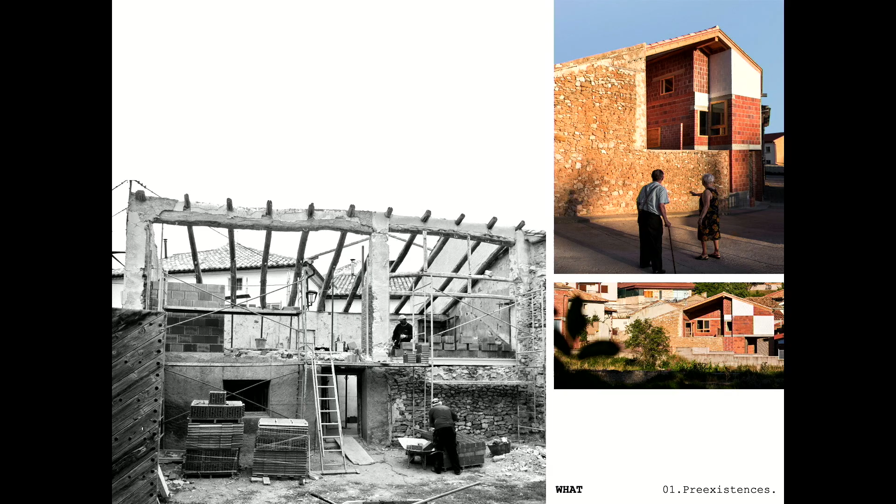Well, the house is built occupying an old corral in which there was a barn, a small construction with 2 levels, one for the animals on the ground floor, another for the storage of grain on the first floor. The stone walls and the wood beams have been kept in their original position. It is the geometry of these elements that shapes the overall volume of the project. It determines the inclination of the roof and the dimensions of the interior court.

The plot is located on the edge of the village, where the houses end and the orchards and fields begin. The house is protected in plan and adopts a U shape. In this way, it avoids visual contact with the neighboring houses and opens toward the landscape. At the same time, it generates a patio, a courtyard in the center.

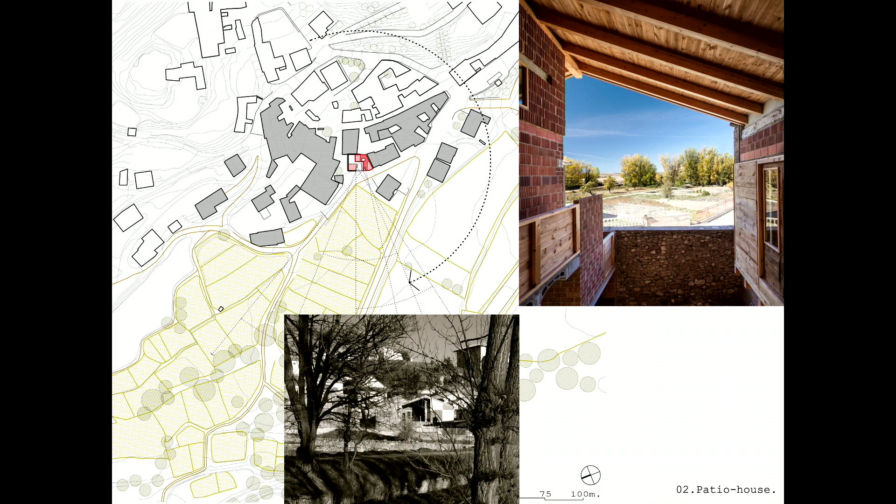The whole house is topped by a very simple sloping roof. The patio is also covered and becomes a kind of indoor volume, which remains always protected and shaded. The volume of the patio equals 1/3 of the total. All the external woodwork faces the patio, and it's also protected from the water and sun. That's very practical because they can be very simple, and some of them even recycled. In fact, we could consider that all the woodwork is internal woodwork.

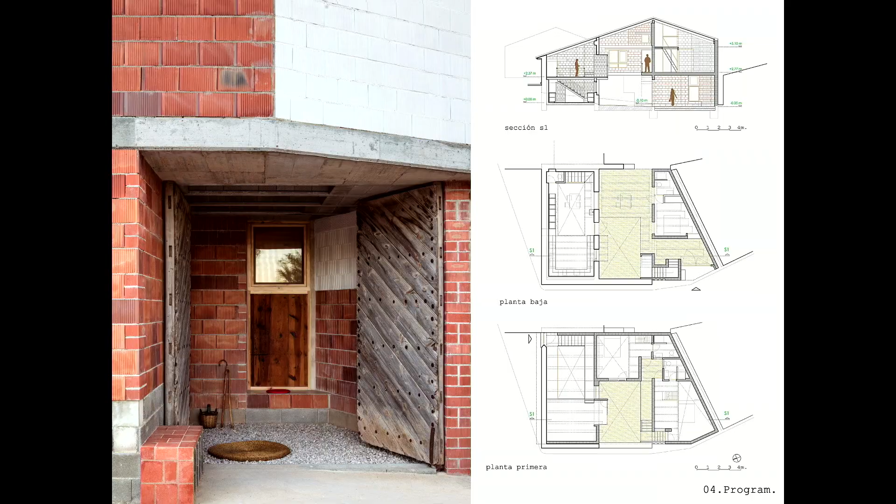The access is through a large and recycled corral door. When it is open, it becomes an area to sit down or stop to talk with the neighbors at the entrance, which is a very common activity in the town. This space communicates with the patio passing under the house. The patio is the heart of the house, the most used and most polyvalent space. Most of the day it is shaded and well ventilated.

This is the access: on the right side to the common areas, to the other side to the 3 rooms separately. The common area is situated inside the thick stone walls of the old construction, which is also semi-buried. These zones maintain a constant cool temperature, always around 25 degrees in summer. It contains the dining room area, also in the patio, which is used most of the time.

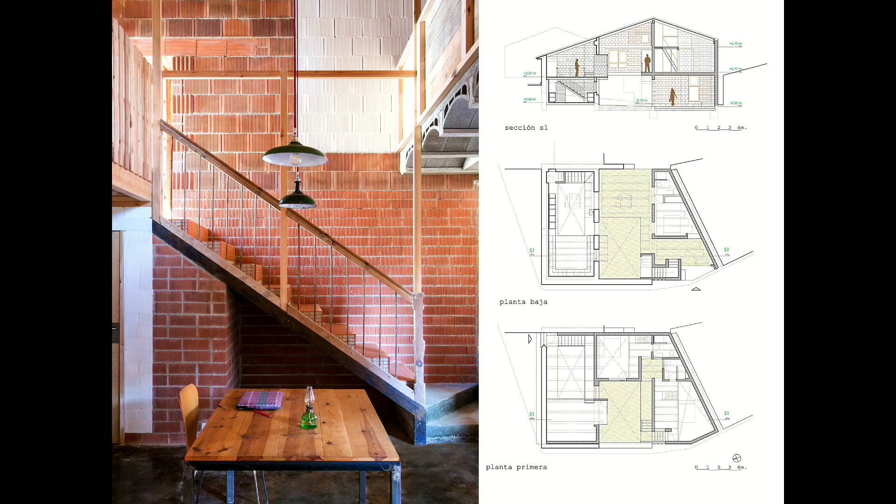The kitchen, well, in fact, there are 2 kitchens in one to allow the use of several people at the same time, and a wooden mezzanine with the living area that is also used as a study and play area for children. The 3 bedrooms are situated on the opposite side of the patio, 1 single room on the ground floor and 2 family rooms on the first floor.

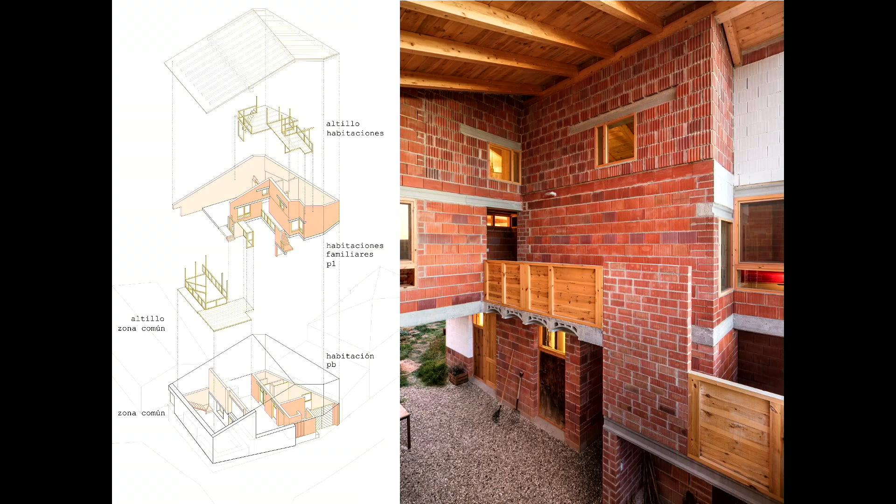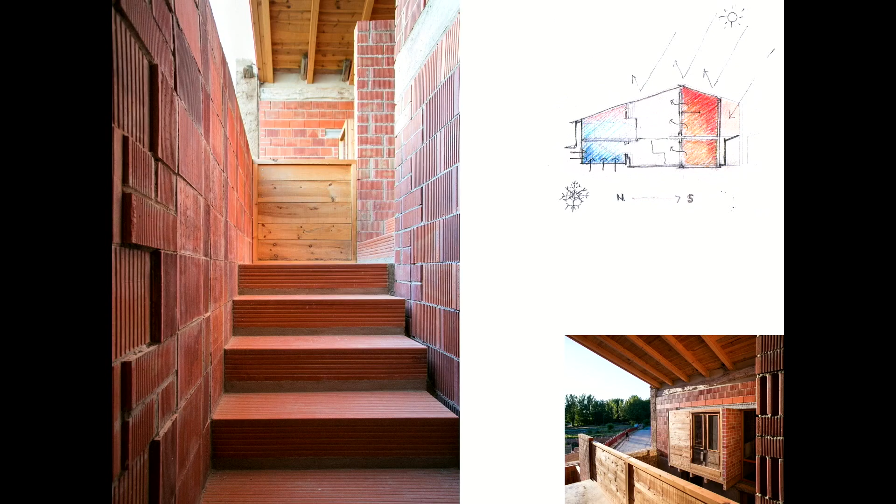They are built with brick, with a single layer of thermoarcilla, thermoclay. And these walls are, of course, less insulating than the stone walls, but enough to insulate from the sun during the day and accumulate some heat that is released at night. This works very well because at night the temperature drops a lot and it's usually quite cold. That's because we have to think that the town is at 1,300 meters altitude.

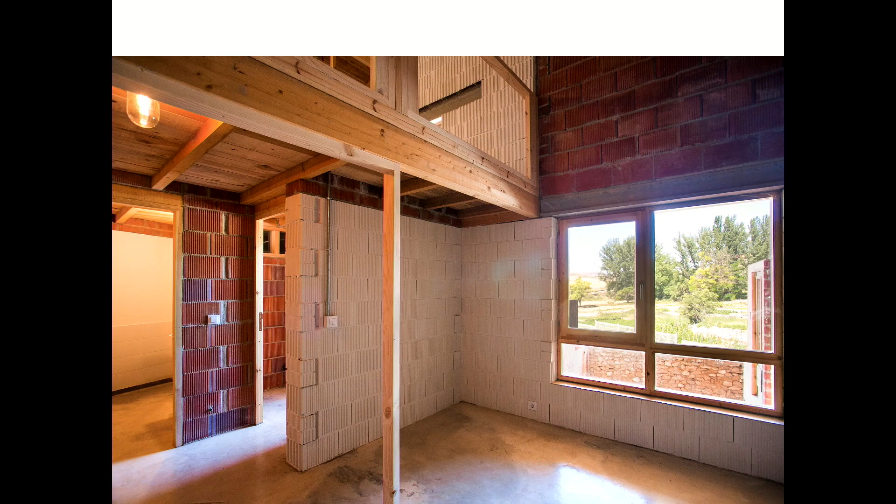The access to the bedrooms is by an external staircase that is ceramic. The rooms are focused on the landscape, and they have 2 levels, one downstairs for parents and another upstairs for kids. These 2 levels are built with a wooden superstructure and communicate internally with a staircase, also made of wood. The wooden superstructure occupies the highest part of the house, taking advantage of the space that remains under the sloping roof.

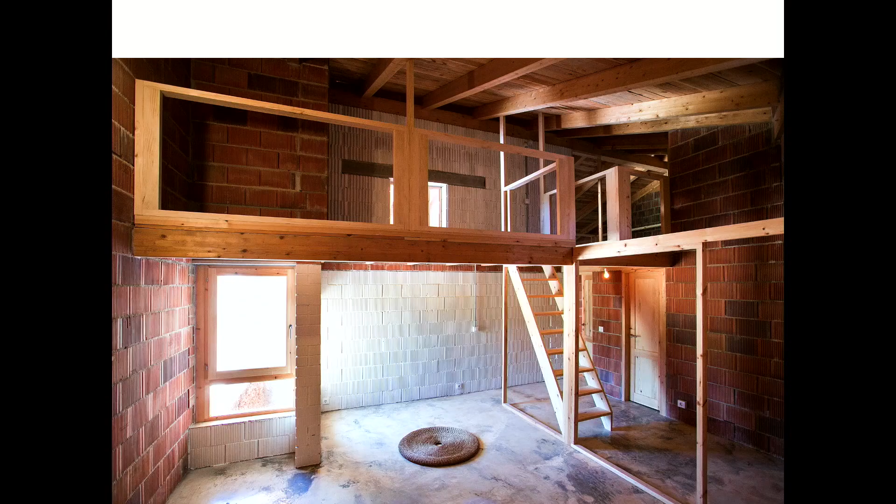The interior divisions were made with wooden frames that were later covered with recycled wood to make the railings. In the future, these divisions will allow us to split each room in 2 if we want.

Well, I have to say that a few months before starting the construction, I didn't have a clear idea of what materials I would use to build the house, nor what the constructive system would be. The answer to these questions arrived in a very simple and natural way during the previous visits to the site, while traveling through the surrounding villages and visiting the local warehouses and material stores, but especially looking for the builders who could work on the house.

I remember this day very well. I was talking with Puyo, a bricklayer who was doing small things in the area. He explained to me that the thermoclay was used a lot, especially because it was a large piece and allowed them to work very fast. And then, casually, he said, what I do is take the 24 centimeters depth thermoclay, because since it is 24 centimeters long, it allows me to combine 2 pieces so I don't have to cut.

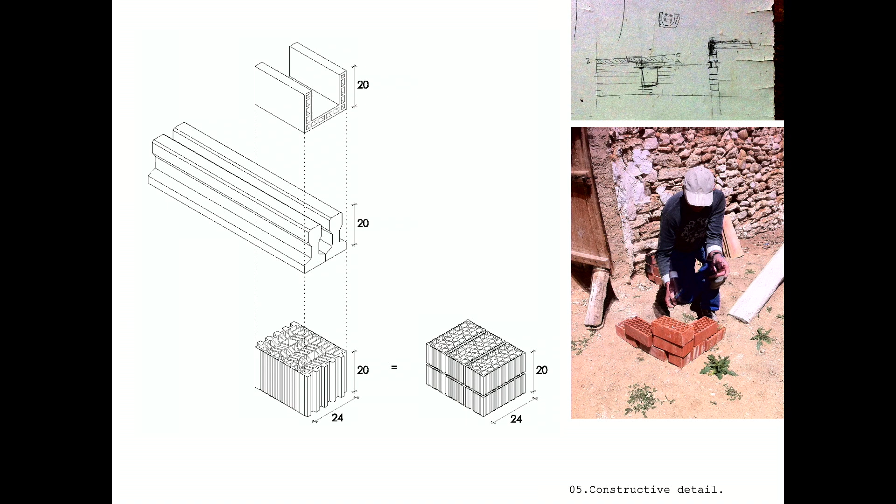Exactly, the thermoclay piece of 24 centimeters combined long and height perfectly with Gero, so that 1 piece of thermoclay equals 6 pieces of Gero. Thermoclay is the big piece, of course, and the smaller brick is what we call Gero.

He also explained to me that the prestressed concrete beams with a height of 20 measure 12 at the base, so 2 beams also make 24 centimeters, as well as the thermoclay and Gero. Finally, the band piece also makes 24 at the bottom by 20 centimeters height.

Well, it was a conversation of just 30 minutes in which we took bricks and put them on the ground, making one-to-one models of different situations. We also made some drawings on a wooden board that was on the site. And in these drawings, for me, everything was already there. In fact, I saw that with that unique constructive detail, the house could be built.

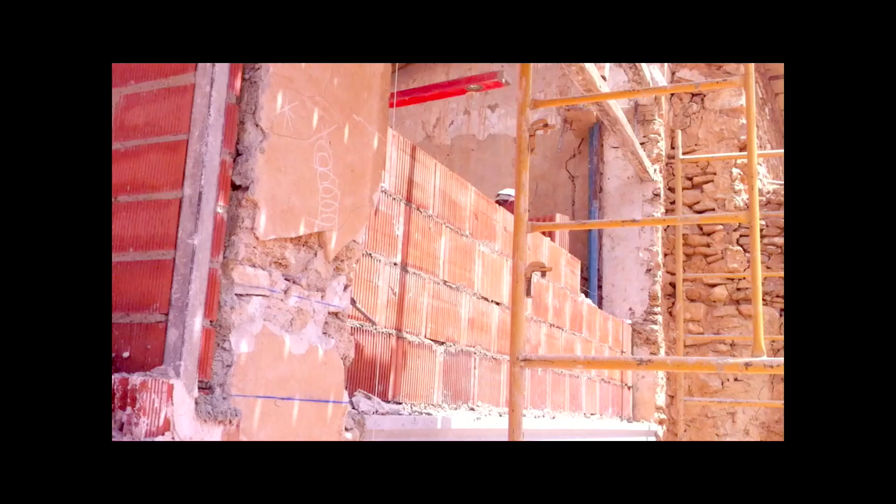Finally, we chose this bricklayer and his assistants to do the work. They were a group of 3-4 people from Romania living in Teruel. They work a lot for the people of the area, doing basically reforms and partial repairs of houses. They work by the hour, 16 euros per hour, 10 hours a day, almost non-stop.

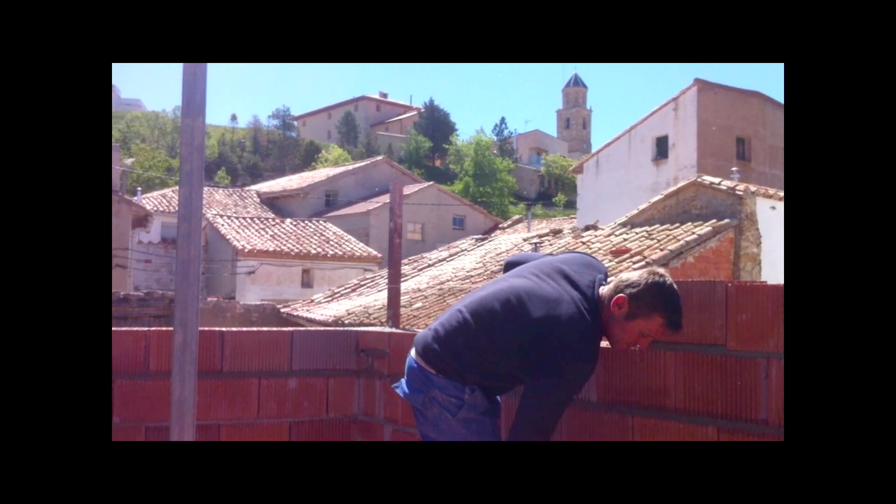In this case, charging by the hour is decisive, because the simpler the construction was, the faster they could work. And the faster they work, the cheaper the house could be. And the fact that the constructive system we chose was very common for them allowed them to advance very fast and therefore economize the construction.

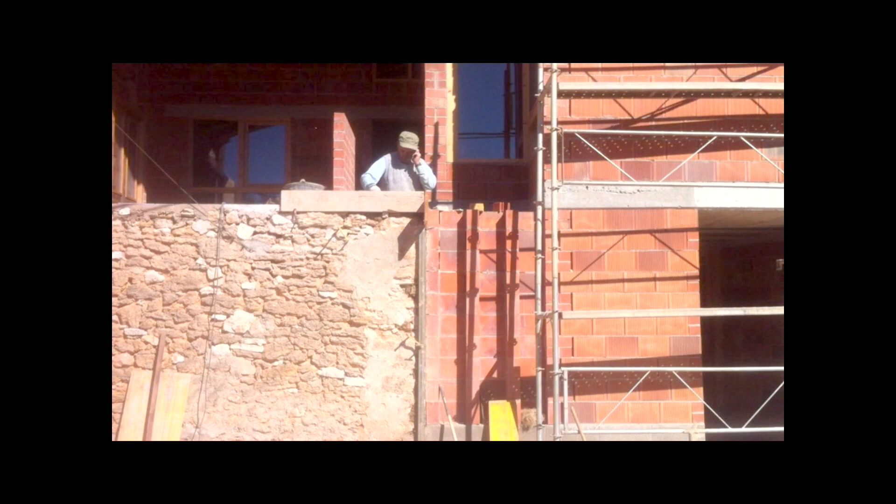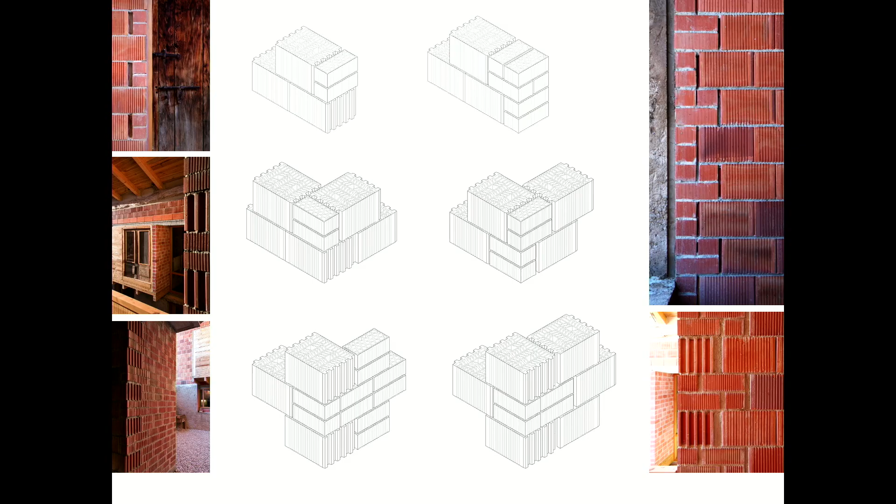The idea was to build like a Lego, fitting pieces without having to cut them, building a system of walls of 24 centimeters depth with a horizontal joint rhythm every 20 centimeters. The combination of thermoclay with Gero allows solving wall ends and corners in different ways, but always without having to cut pieces. It was about doing what they always did, but with the difference that it could be seen. The same system, but with good lyrics.

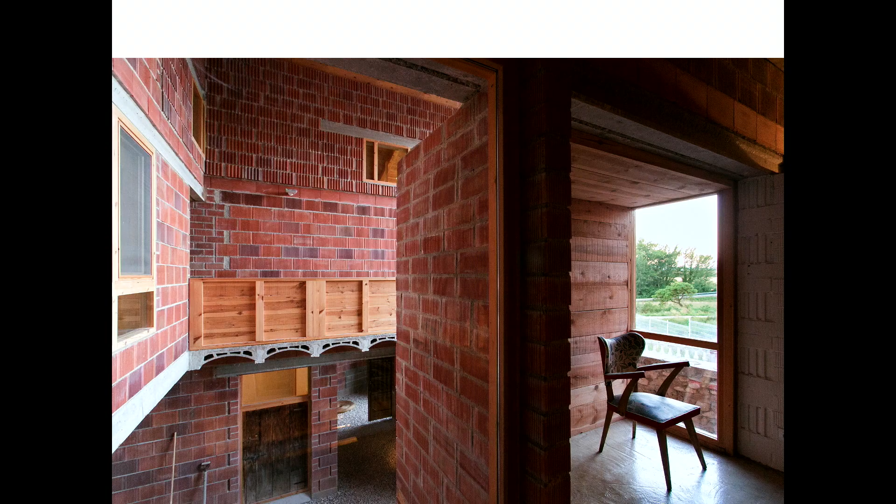And also, in the same way as happens in Lego, we were building the structure of walls at the same time that we built the exterior finish and the interior finish. That was also very good for the project because it accentuated the confusion between inside and outside.

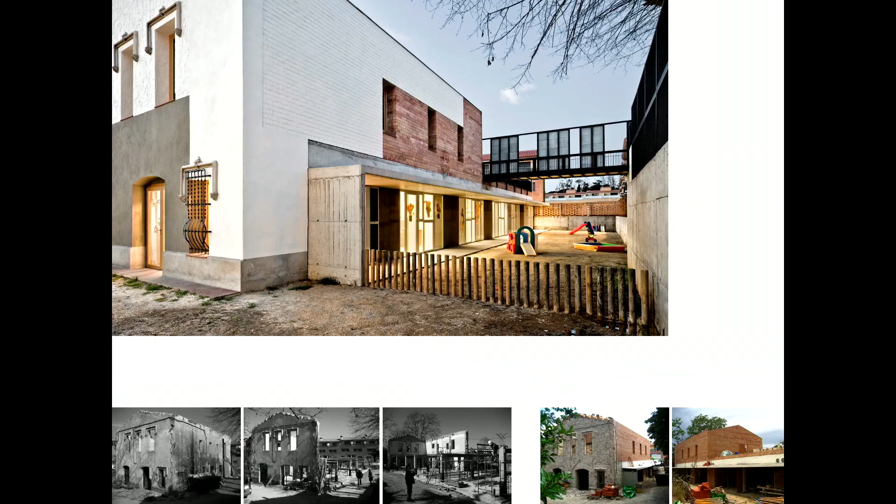We had to build a new school by expanding an existing building, but finally a large part of this building, an old house, could not be saved, and it was necessary to demolish and rebuild 50% of the volume. If we had to remake the volume in its previous form, we wanted to differentiate the original parts from the reconstructed ones. So we convinced the builder and the town hall to make the walls with a conventional brick, but without the final coating.

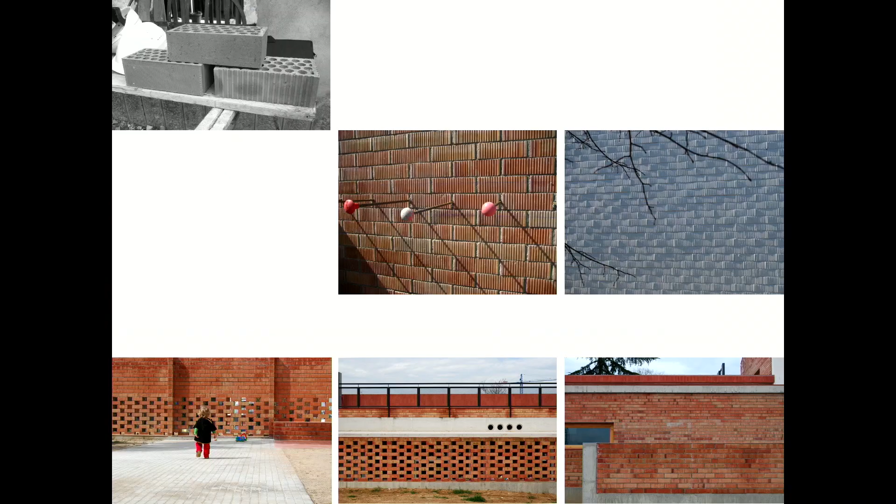We chose this brick with scratches that was already there. New textures appear, and then also new combinations. And we realized they were materials not very experienced as a final finish, but they could have a great power of expression. It was a special result with a piece that we had very close, so very easy, very cheap, and without having to design it. We liked the result so much that we decided to use it on the rest of the walls of the new construction and also on the perimeter of the site.

Now we return to the house in the springtime and the towns around. Normally, the towns around have two sides. A side designed to show to others, that faces the street, with a finish that wants to be novel, generally smooth, rendered, painted, with conventional windows and doors, and formally very similar to each other. But there is another side in these towns, the back side of the village, the one that generally faces patios and orchards, normally the part of the house where there is more life.

It's a facade that is not thought to be seen by others, but these are the places where more things happen, and from my point of view, where the most interesting things happen. Because there we find a more functional architecture, more direct, more honest, responding clearly to the needs of the users. More generous openings appear, terraces, overhangs. There are more volumes, voids, shadows. The materials are simple, but they are shown without any problem.

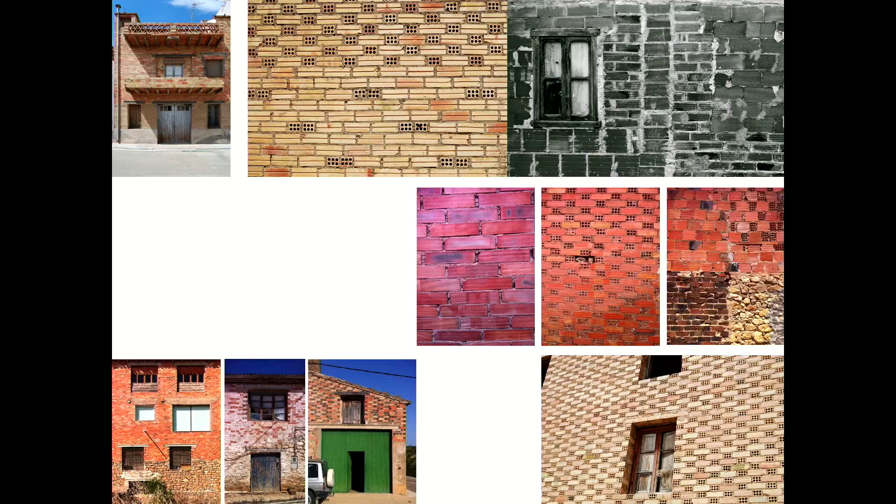We can find many original solutions, different textures and all kinds of experiments. Many types of ceramic pieces are used, especially in their most basic versions. It is also the building way that's used in the repairs of old houses or buildings for tools, vehicles, agricultural machinery, or animals.

It is obvious that people, from the town, think that it's an unfinished architecture, that it's not to be seen, not to show. But it's also obvious that it's part of the landscape of the villages, knit and mixed with the old stone walls, and part of the rural landscape. Bricks and pre-stressed beams have been natural substitutes for stone walls and wooden beams since the post-war period until today.

But is this vernacular architecture? Vernacular architecture means working with what we have closer, which is easier to build and cheaper. These were the criteria by which the town was built. During centuries, that meant building with stone, wood, and mud. In fact, these were the only materials they had, extracted directly from the environment. The result was an architecture integrated into the landscape and without architects.

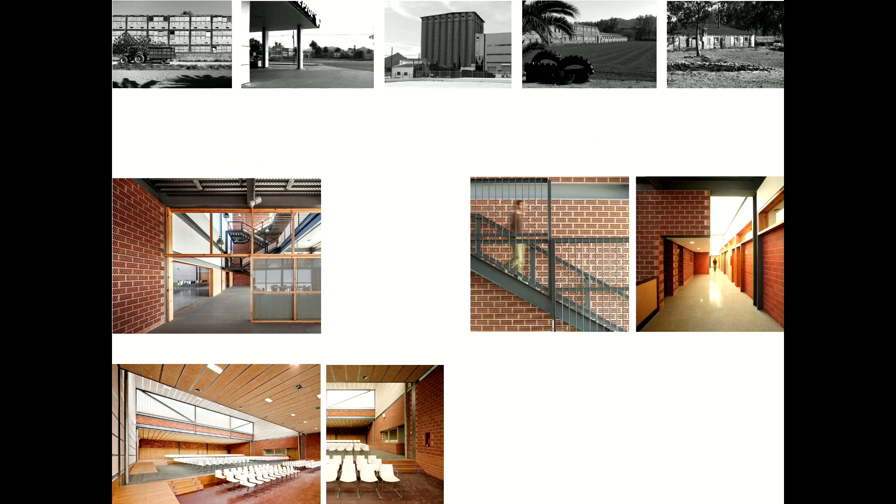That means two scales: an industrial environment typical of the periphery with light metal buildings, but directly in contact with small agricultural constructions, farms, and self-built architecture.

In this case, we used these basic bricks that we can see everywhere in the delta. We use them in part of the facades and in part of the interior walls, but also to improve the acoustics, or solve the air conditioning return, or to ventilate the room installations.

Some of these solutions were not in the initial project, but the continued contact with the construction materials and with the most immediate environment made the result look like this.

Continuing with the project in the house in 3 springtimes, the construction materials for working in these villages were basically obtained in the local building yards. There were small stores in Utrillas, Montalban, Aliaga, little towns about 20 minutes away, and in Teruel, the capital, at 40 minutes. Depending on the warehouse, you could find more or less variety of materials from different parts of Spain. But what it always had in stock were the basics: ceramics, bricks like thermoclay and gero, prefabricated concrete products, and wood.

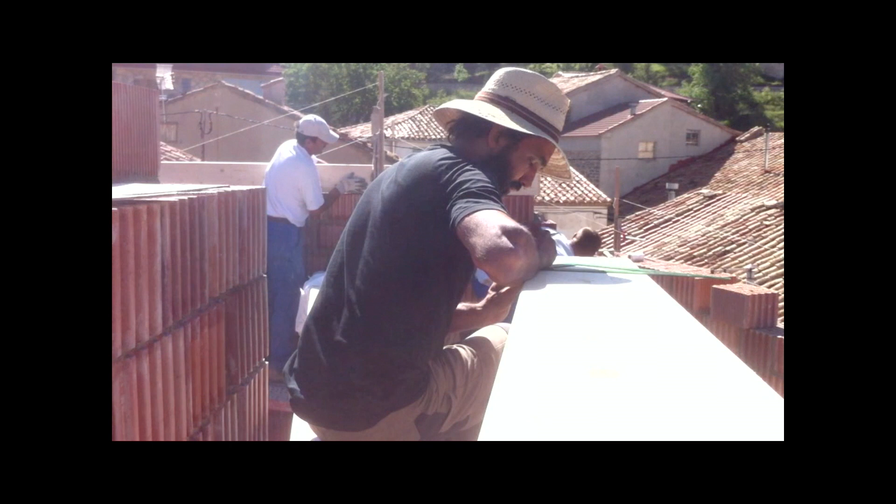This constant presence on site, combined with the intermittent and slow rhythm of the works, is very important to the final result of the project. It allowed us to change, improvise sometimes, and experiment during the process. If we think like a film director, the process was more like a documentary than a movie—with quite clear starting ideas, a starting project, but an open system in which reality and improvisation fit, and many times were the protagonist.

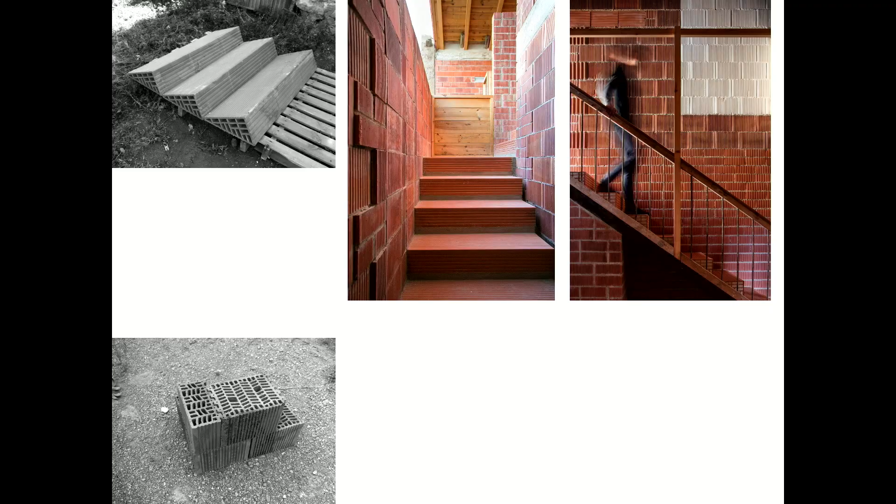During this process, we incorporated some pieces found in the construction warehouses, like ceramic steps, stock remains, things I didn't even know existed. We also found in the barn a large number of old woodwork pieces that had been saved from homes demolished around the area, and we decided to catalog and reuse them. They solved doors and windows, but were also recycled as interior divisions, balusters, shutters, etc. Of course, we also recycled stone, wood, and tiles from the demolished areas of the barn.

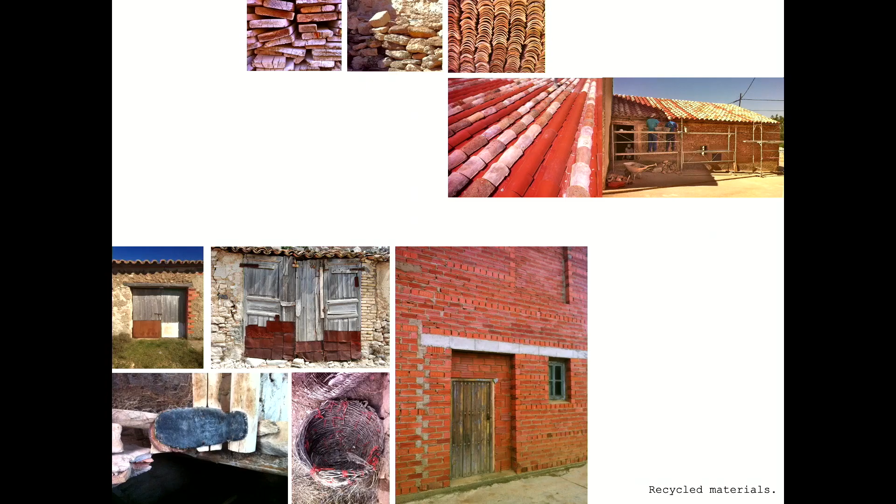But we recycled in a calm way. I mean, we simply reused what we had close by and what could serve us, in the way it has always been done in the villages. Things are repaired and reused again and again, just because it's the most logical.

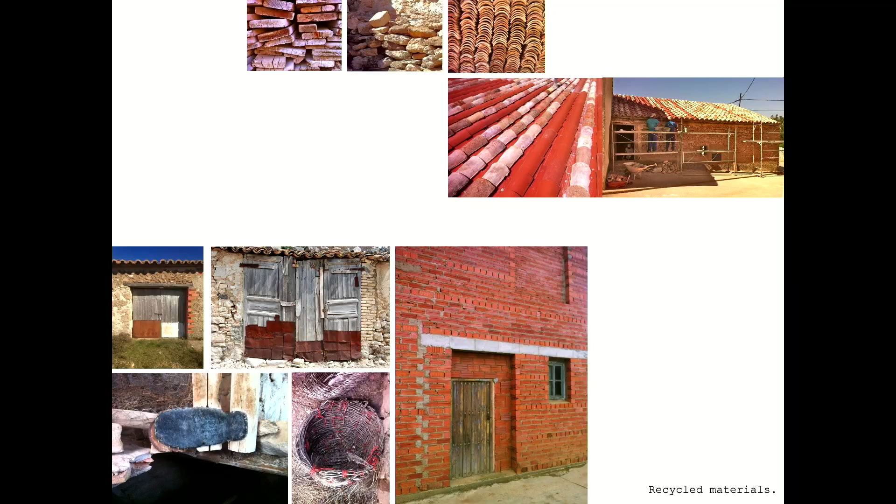We also recycled materials generated by the construction itself: pallets for handles and furniture, Galician pine wood left over for tables, shelves, handrails. Or, for example, the broken pieces of thermoclay you can see here. Some of them were broken when they arrived at the worksite, by transport or defective manufacture. Those pieces were at first returned, but later we decided to separate and save them for use in the final part of the house. We put them turned 90 degrees, so the broken parts were not visible.

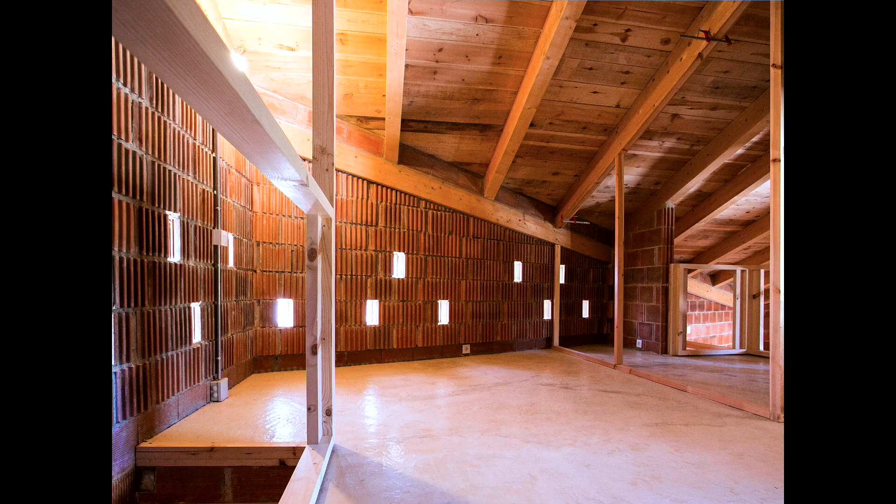The result was a different texture, which also helped us differentiate the final surface of the mezzanines from the rooms. This is the view of one of the almost finished mezzanines. I think we managed to turn something that seemed like a problem into something positive, and these kinds of situations are the most interesting for us.

But if I have to talk about a reference, I should talk about this: Alvar Aalto's house in Muuratsalo. I like almost everything about it, but even more than the result, what really interests me about that work is the attitude. Alvar Aalto seems to have said about the experimental house, or the summer house, that we must combine laboratory work with a play mentality, and vice versa. That attitude, maybe, was the clearest influence I had, and it's the one I try to keep with me during the whole process.

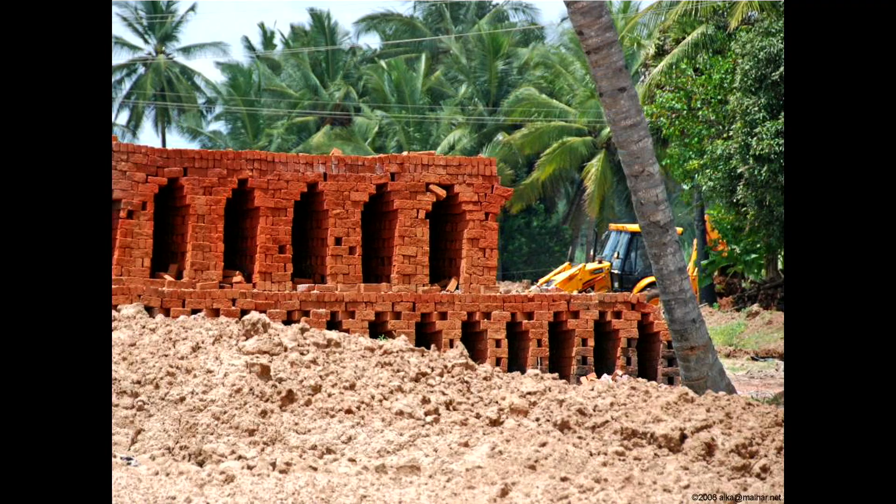And the bricks that get made are actually not like the factory bricks, where you have to build huge ovens and Hoffmann kilns with coal, etc., going into it. The ancient way of making bricks, which is still being made in most of the world, pre-industrialized still in our time—what happens is that the bricks are stacked as a pile, and the stack is the oven. When they finish cooking, the bricks are sold, and the whole oven is gone. So this is how humans made bricks.

The genius part of the bricks, or why it was a manufactured material, was because it was modularized. Even though the brick is rectangular, you could make curved things with it, unlike Lego, by the way, because the mortar allows you to do arches and do all kinds of things. But what is interesting is how does it affect things?

For me, it was important to see how bricks affect the socio-economic and environmental impact in today's time, because most people dismiss bricks as a very high energy material because it requires so much coal. In my journey, three decades as an architect coming from Bombay, from conventional schooling, and discovering things by thinking more deeply about them, I realized that you cannot just say that brick, in all our green rating systems, they say how many kilojoules.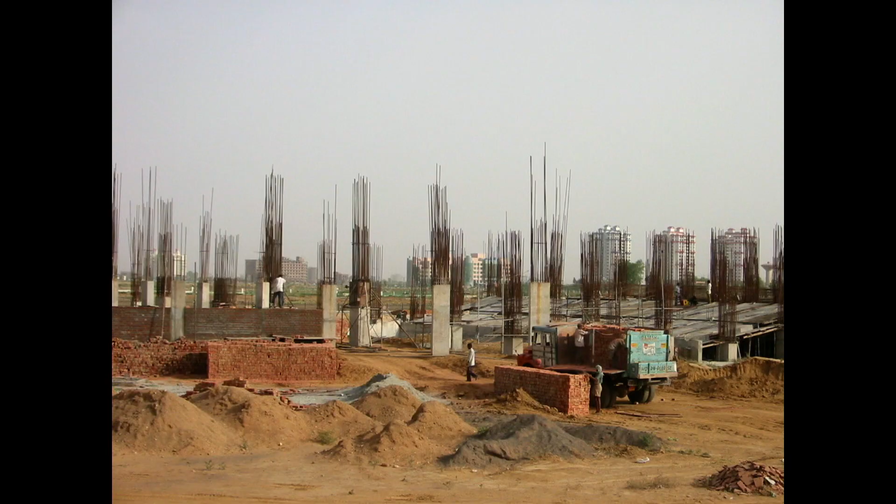It's not like that. There is not only quantitative energy, there is a qualitative energy. Am I cooking it with coconut shells or with coal? It makes a huge difference to what industries have to go into taking the coal out and so on. So I went into deeper questions in this journey, but I want to explain that where I came from was

that brick, even though we have built the biggest complex cathedrals and all kinds of large spans and very tall buildings with brick all over the world, not the natural laws, but the human laws have prevented us today from doing more genius buildings with brick, because we have made bylaws such that we can only use bricks as infilling material inside concrete.

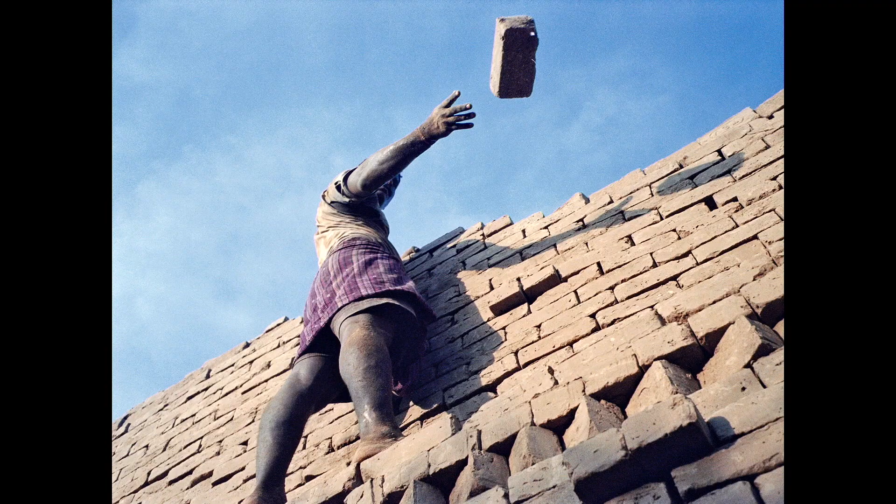We've made it in every country, I don't want to deviate over there, but I was quite intrigued that a brick is not even allowed to take weight in many places. And even in Australia, they call it brick veneer, as if it's just for show. So having looked at the area, I realized in our times that to understand the complexity of materiality in the age of climate change, we have to look at the material not from the time we get it from a manufacturer's catalog, but from the way the material is already manufactured. Already there are questions embedded.

So here I noticed in our context, these are regular industrial brick sizes, but they're not industrially made. These are handmade bricks. And I started realizing the way the making of a material like brick is embedded in the territorial questions of the place. For example, these thinnings come out of reforested trees that are grown for scaffolding, because these woods are mostly casuarina. It's a very straight tree, and it's very useful as scaffolding. And the thinnings of those that the people planted are used for firing the ovens.

And these are the typical brick stacks, which are then plastered and closed, and then they go into firing. And after they are fired, the bricks which are on the outside are a bit cooler, so they are less baked. So either they are rebaked in the next round of firing. So there is no oven. This is the oven. And whatever is external, you might use in interior areas where you don't need such total brick strength, or it doesn't have to be that waterproof and so on.

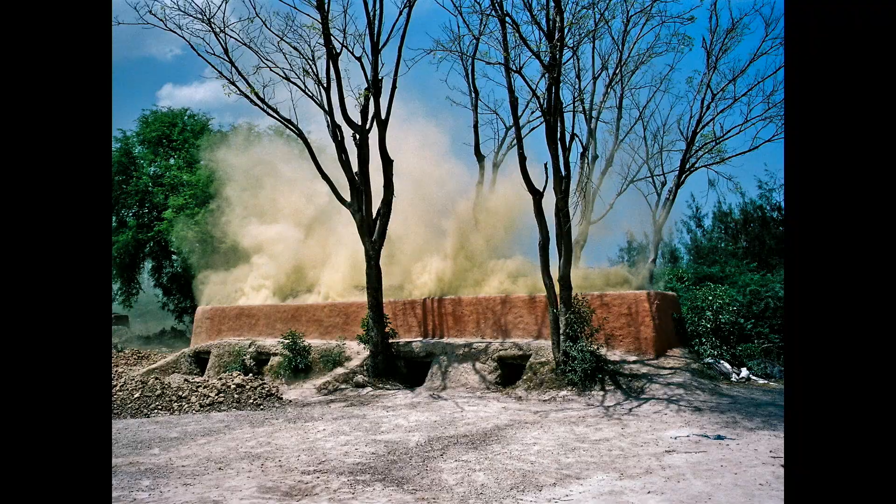So here you see a society where they are able to produce small amounts of bricks only according to how much clay is collected after the monsoon. Otherwise, they are probably rice farmers or they grow this kind of material. And they also do lime mortar. They make lime. There are lime kilns and so on. And so when I came to South India, Auroville, and there was a whole city to be built there, I wanted to see to what extent, with new eyes, I could rethink the brick.

So Wall House, the project that a lot of you probably know, was my first application of bricks. But here you will notice that these bricks are only 2.5 centimeters high, because in my search into the way bricks are made, I realized that if it is all being done in a handmade fashion, then it's good to stick to the handmade size that they also made. The other sizes were made for the convenience of the machine and various other factors, and introduced in the local landscape.

So I took the old South Indian bricks that are still being made in very small pockets, and those bricks are very easy to work. They are not heavy because they're so thin. It's really like craft work, because you're not exhausted lifting a brick. So the brick and the mortar are almost equally thick, actually. And the brick is weak compared to the factory brick. And I realized that I also didn't see it, like we have just spoken in the previous examples.

I haven't seen it without mortar and without plaster. I exposed it for us to start seeing it more clearly, that these bricks also exist. Because normally the imperfections exist because it's done in a very local way. And I realized that with those imperfections, when Louis Kahn came and built those fabulous brick buildings in India, he was using wire-cut industrial bricks. And so we all started disliking our own bricks, because of the imperfection.

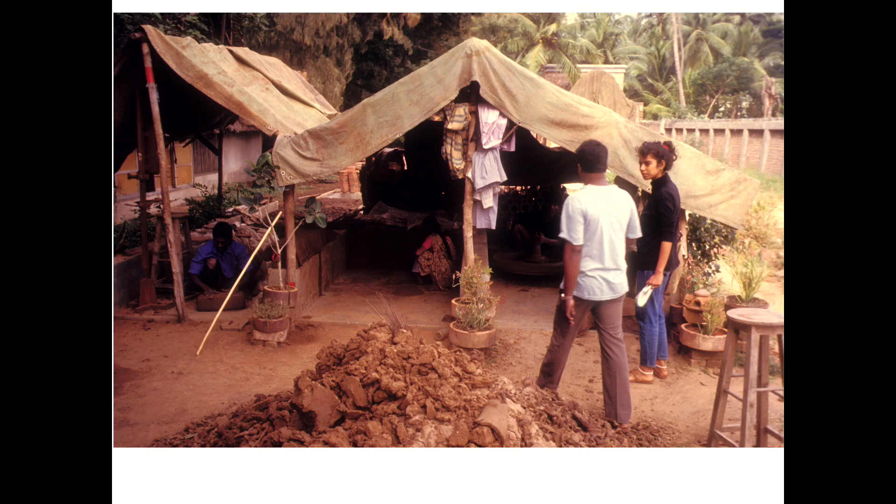But I'm just showing you an image of myself from 30 years ago when I was doing this. I was just straight out of school. I started my practice at 23, actually. I think in a lot of things, you are very naive, and it's good. You don't fear so much. Later, as you grow up, you ask too many questions and don't want to take risks, I suppose.

But what was interesting for me is to realize that there is no boundary needed between brick and the use of terracotta, either in the floor finishes or in the construction of roofing tiles and so on. And I started discovering that whenever a material exists, like clay, there is the skill. It looked to us like there's no labor, unskilled labor we were calling it, because you thought there's nothing in this place. I came from Bombay as if there was nothing. And now I know that there's always something, that in the foreground there is clay, in the background is the skill of some people making pots out of it.

So I started working with that material in a holistic way, not separating the brick from the masonry of the wall from the ceiling and so on. And eventually landed up using cones that we made with coconut shell fired in the open, just the way they do it, making stacks next to the rice fields, so the people are not necessarily working in factories, but just producing the material. It's all temporary, but the house is permanent, and the processes don't leave their imprint.

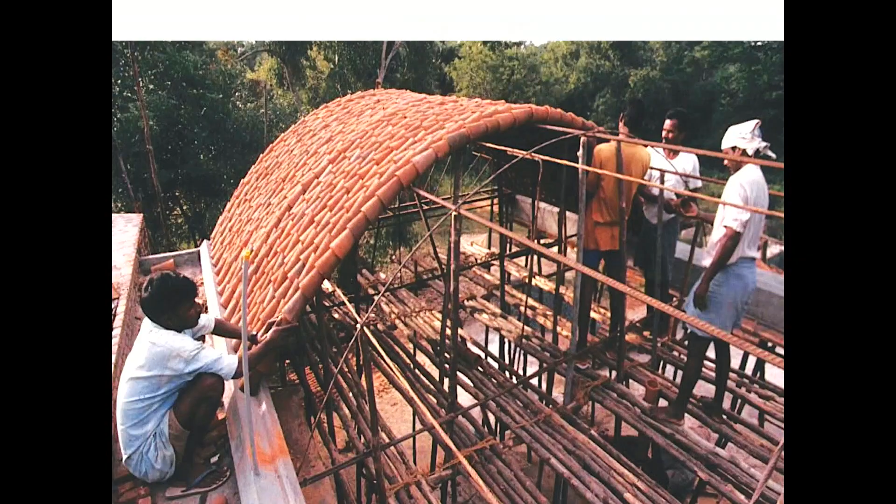And I started using these kinds of highly insulating materials for the ceiling through catenary curves. That's why I don't know anymore what is vernacular and what is high-tech. People would call it low-tech, but you need to know lots more calculations somehow to do these types of things, which we usually do empirically. So the advantage of these kinds of systems is that the traditional roofing tiles need a lot of wood substructure, and we don't have wood anymore.

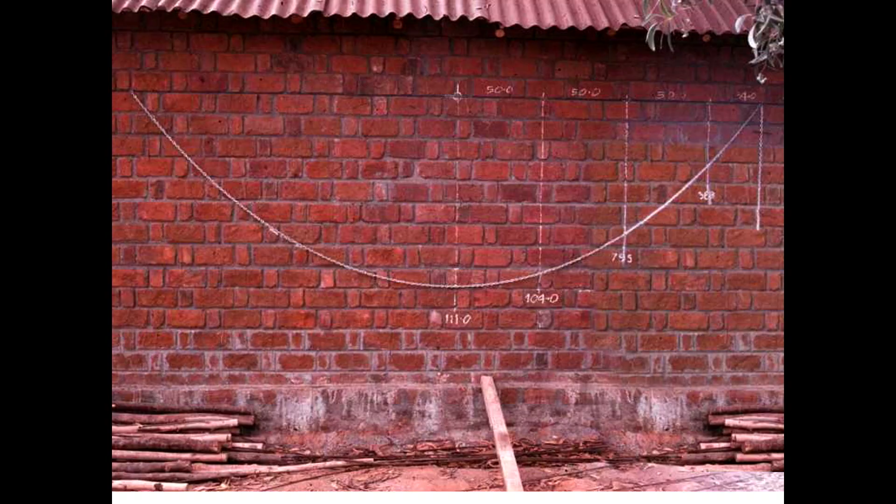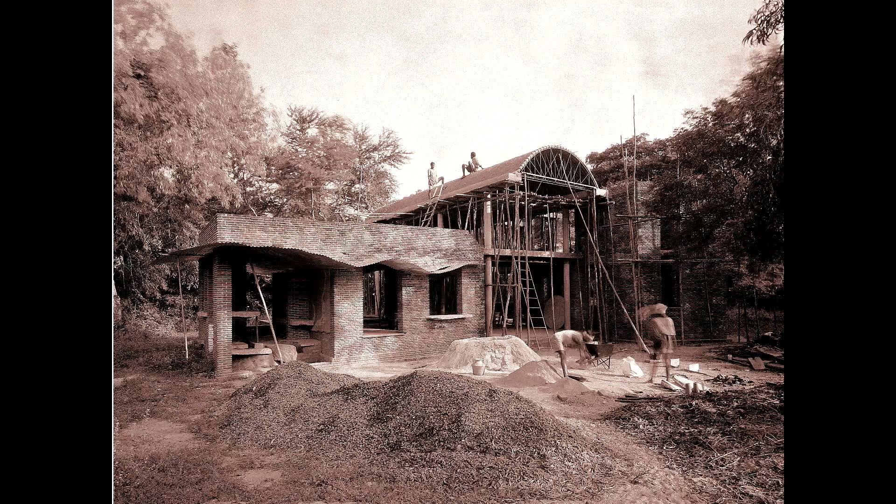So this was a way forward to intelligently use these materials, and I needed a lot of support from the craftsmen. I was supported much more by them than the engineers, because the engineers were telling me all the things we shouldn't be doing, and the craftsmen were just eager to try out. And I had a sense of confidence because they are used to handling material. So with their help, I was able to produce this same wall house.

But I did so many more experiments on the side that I won't have the time to tell you, but I made all kinds of things with the terracotta once I started, and I had a sense of community with the craftsmen, and we got ideas. These are for making this kind of jack arch systems, also in masonry, for flatter roofs, because those vaults will not allow me to use the ceiling, even though it's efficient. So I need a way to make flat roofs.

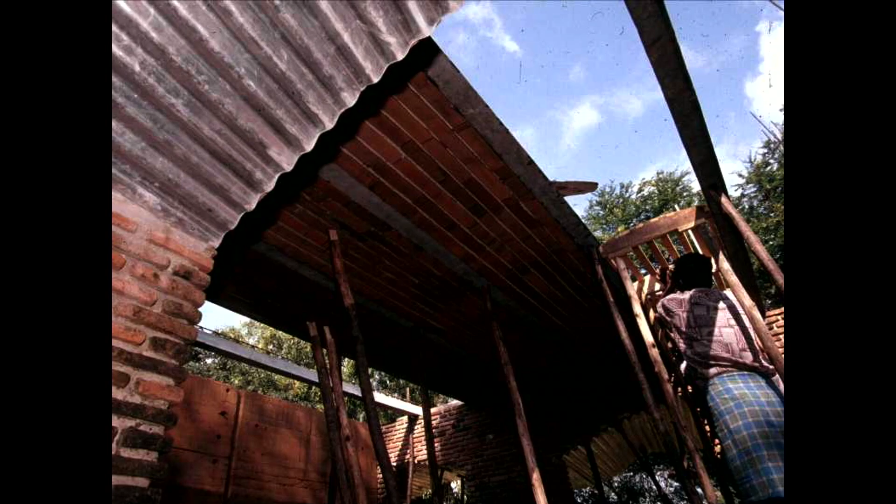So at the same time, to not always need potters, so that any person who's looking for work can do this, we had to design extruders where the clay would just come out in a slightly trapezoidal form, and then you would just cut it, and anyone could produce it. The idea was to build so that almost anyone can build.

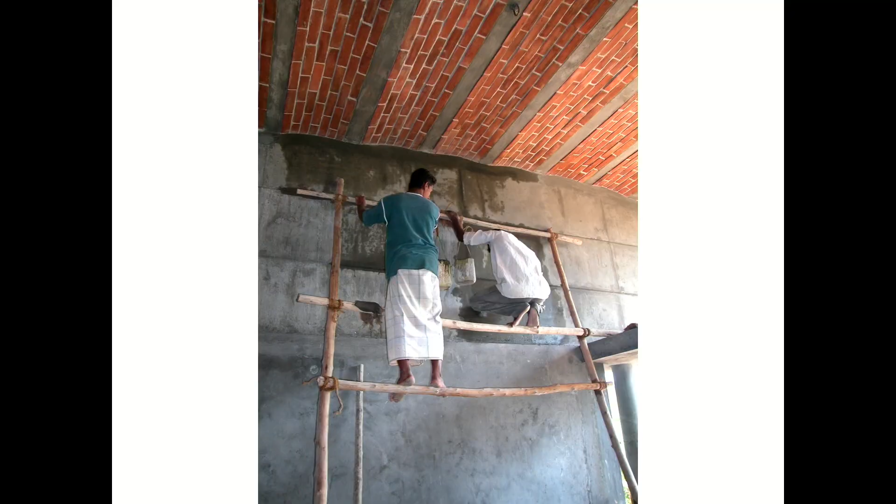Because instead of looking at the poverty in the place, I was trying to look at the abundance. What do we have a lot of, and how can I use that? Then suddenly, instead of feeling poor, you feel rich. So it was very simple. What do you have a lot of? There's clay. What do you have a lot of? A lot of potters. You have these people, sometimes together you upgrade knowledge, and you figure out how to go forward.

And as I went along, I actually found a way to use the original pot that got me thinking. This is the rice cooking pot. It's our version of paella. It's called pongal, that they make in this kind of clay pot. And nowadays, there are entire communities who know how to make that, but nobody buys them, and they keep trying to sell them. So urbanization is threatening the livelihood of craftsmen, and I was thinking how to give them a permanent assurance of their livelihood if we make products that we can absorb in construction.

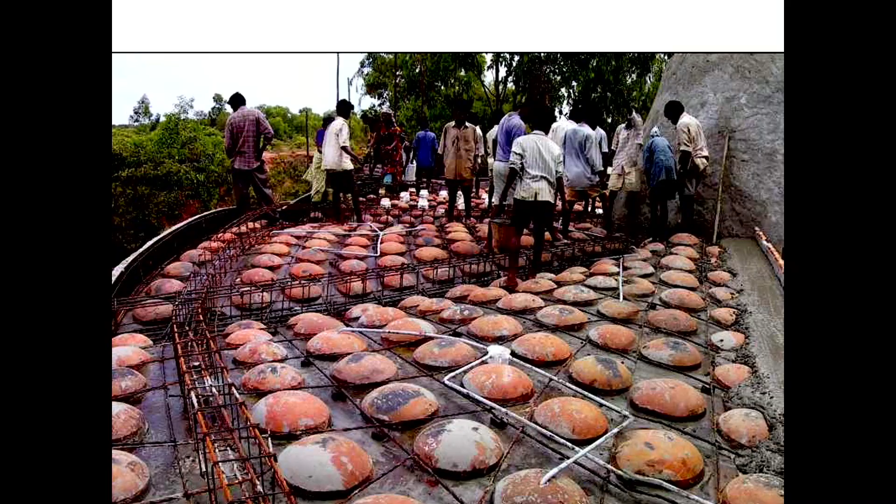So then I started developing other ceilings. For example, I used these kinds of pots to create lost formwork, to be able to reduce the steel, like two steel bars out of three could be removed, because it is used as an efficient waffle slab principle. So I started using terracotta for all kinds of things, including formwork. And this is, of course, in this wall house again.

The wall house became my laboratory, and I tested here all the things for larger projects where I had bigger spans to solve, like a 14-meter span multi-purpose hall that had to be made, and I didn't want to have those beams. So I tested this in the wall house, and the craftsmen and I could test. I also did about six types of roofing systems in that house. I had to really watch out that it doesn't become a cacophony, because it was my laboratory, and it should also look like a house.

But I wanted to test things without the pressure to have to prove to others. So here, for example, for intermediate floors, these are flat vaults made out of the same brick, because here I don't need insulation. So the material of the wall is the material of the floor.

So in a way, this house is still, for me, a very contemporary space. I'm not a very nostalgic person. My sense of space is very contemporary. But I don't feel that contemporariness has to be delinked from the material and the making of the spot where we are. Because I do think architecture has to be grounded in place, or we don't feel very well. So I'm going to run you through some images of how that house actually looks, where the terracotta quality spreads all over.

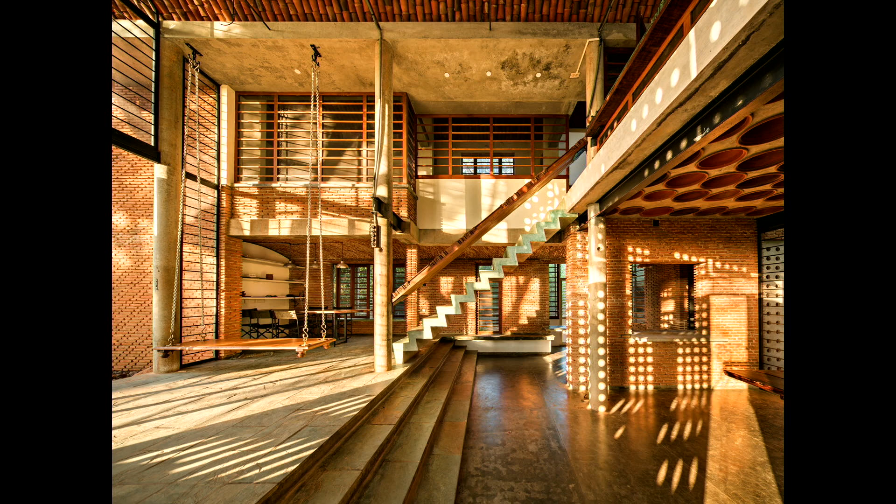I was very appreciative of the previous presentation because I find a lot of similarities, so well curated, I feel. It's a very different context, but there is a kind of patchwork of the same material according to the inherent logic of not trying to waste any material and still create space, define the different elements, and leave different imprints. This is actually my house when I live in India. This is where I am.

So here you see that even the bathrooms and the floor finishes, I tried to not. Once you start doing something, you realize that you don't need to import materials from far away. You can get really addicted to that idea, and you start managing to do almost anything. Like I took natural stone instead of ceramic tiles, and I found it such a luxury to be able to build, just like you can cook with whatever you have in a place, and it depends on the recipe. It doesn't depend on the ingredient, how a thing is manufactured. And I think architecture is the same.

But you see there's a rammed earth wall also in the background, because I was testing that for another project. So I was comparing all these things.

So the house is a result of all of this. But then some of those results have been applied in other projects. Like here is a brick ceiling. It was more profitable in a low-cost housing project to apply only the ceiling. Or here, this is another very, very modest kind of housing, which was also produced in this technique.

And it was very interesting for me to realize that all this very deep and rigorous research done in materials turned out to be, even though my house and the other previous experiments in brick looked like much more of high budget, people weren't believing the low budget because they found the space looking luxurious. But then they saw that in other projects and bus sheds and everywhere people were using these techniques.

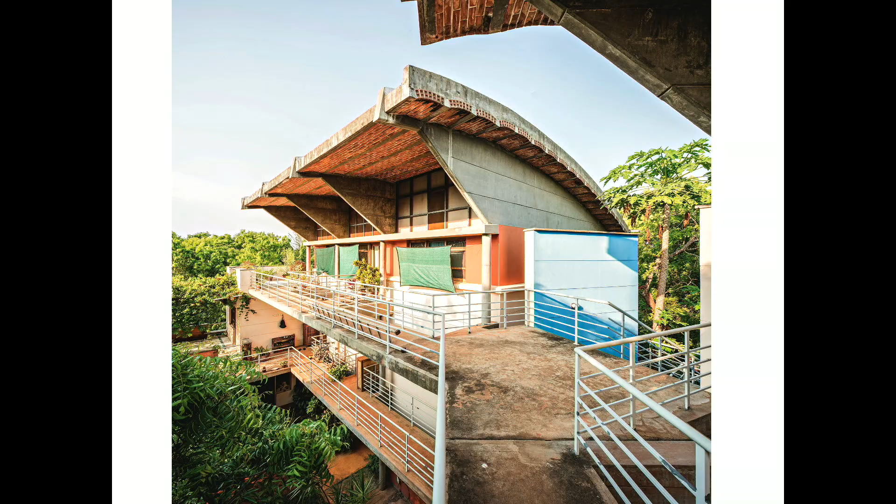And so it's very interesting to see, this is another, it's a skills campus for teenage children to develop their skills. So there you needed some kind of large span. And then these are other projects I did later. This is a co-housing project where not every element has been used. Somewhere there's a roof and somewhere there's one of the different things used.

But then it started having a kind of widespread application, all the different things I did in brick, and knowing how to negotiate handmade with machine made, not to think that a brick is a brick, but there's so much to think in it. Once you decide that it's brick, there are still so many questions and so many different impacts that project can have. So in some of the other cities, like in Pune, I have used also those wire-cut industrial bricks. In these cases, I've also left them exposed.

I'm just going to run through a range of architecture without too many comments, I feel. Because in my case, I want to draw the attention to our context, and then you see how other people built there. And one of the reasons to take off the plaster and to have very large roof overhangs is so that the brick can remain exposed and we can save a lot of resources.

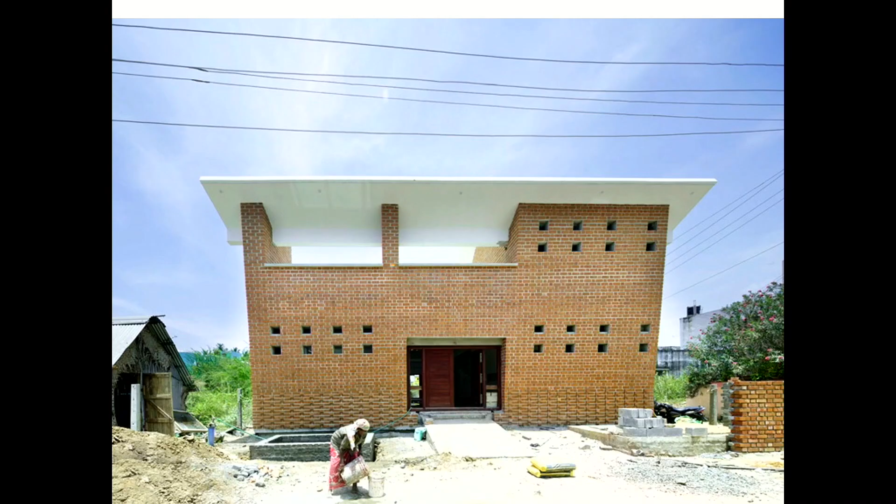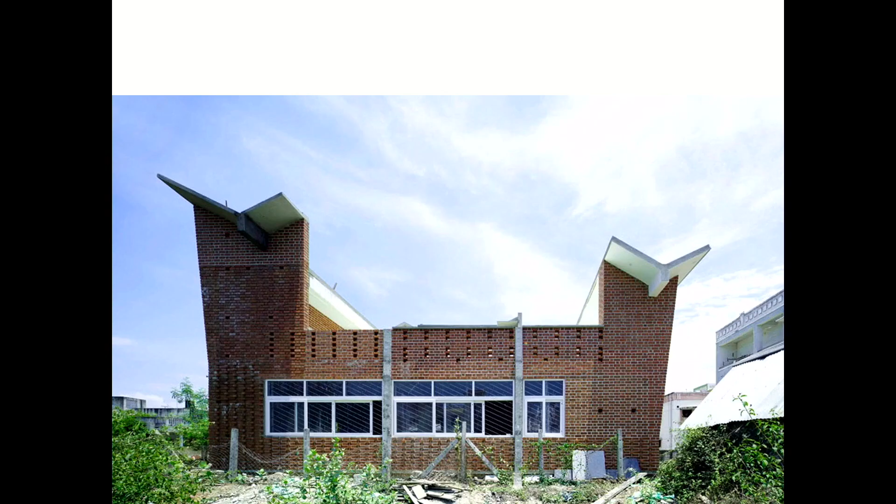So you can see this is Pondicherry, and this is a library which has braille books, very, very modest building. In fact, we have not completed this facade because the owner passed away, and now this is not finished. There are some kind of screens that were placed here. But yeah, so to make that building stand out as an institutional building, but very simple budget building, it's just very simple and basic. And the other people's buildings are also made in brick, but they are more untidily made.

And now the culture to plaster in India has led to the fact that you can work anyhow because it won't be seen. Because it's a makeup culture now, everything is hidden. The pipes are hidden, the conduits are hidden, everything is hidden, everything is complicated to repair, and we can afford to be untidy, which I think is a very big loss, because we actually knew how to be neat. So there is a lot of unlearning, even to get this simplicity out. There's a lot of rethinking involved for all the craftsmen as well.

And then there is one project, which is a daycare center, in which I've used terracotta screens, because we didn't have the budget. It's a very low budget daycare for homeless, associated to children who come from very difficult homes with very socially challenged stories. And I wanted this place to be very solid for them, so that they feel like it's safe and all that. But the budget was quite small.

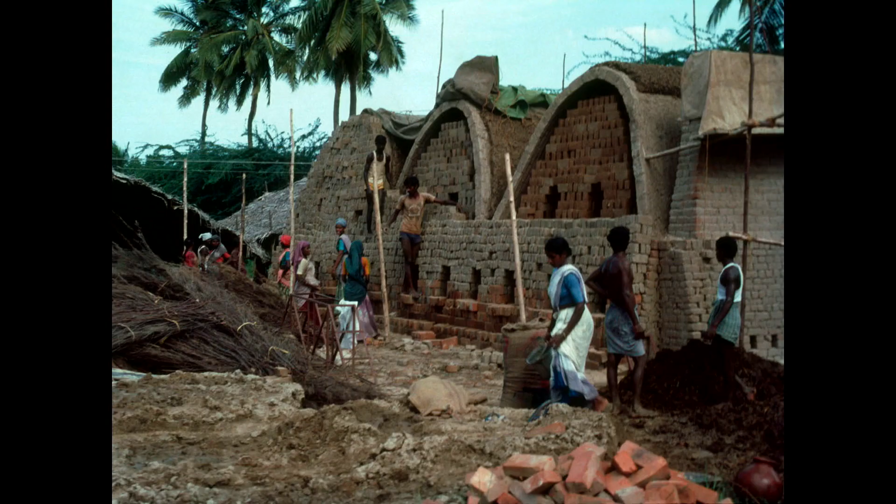And I wanted to know what exactly is the impact on a spot if you build this way, in a place where brick makers have the knowledge. It's like if we all don't have to go and eat somewhere else, but we bring the fire into each and every person's kitchen. What can happen? Everybody can cook, or they learn to cook. So I wanted to follow this through my PhD. But basically, I'm going to show you a few images just so that you understand what this means.

Ray Meeker had basically been concerned that in typical brick making, you need about 980 degrees Celsius to make a brick, and about 40% of the heat you generate is lost in the oven wall. Each time you fire, the cold wall will take all that heat, so you have to put in much more heat. So that is a kind of wastage he wanted to tap.

So what he thought was, if you could build a brick house and fill it with brick or other ceramic products that you have to cook, you use the house as a temporary oven. Then you cook your real bricks, and you come up with some genius insulation so that the heat which you would have lost into a kiln wall, you get for free to cook your house. And then you get a ceramic house for the price of a mud house. And we have monsoon in India, it's very heavy.

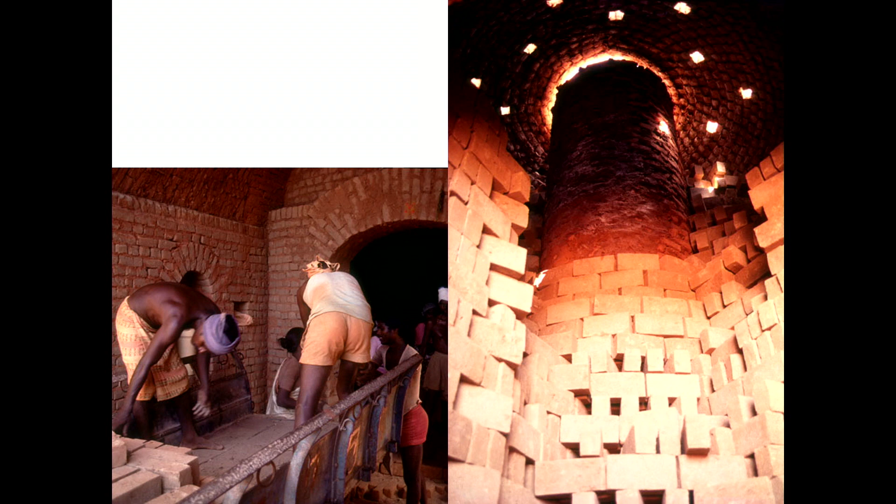You will see in this image that he was inspired by the brick stacks of the ancient way the Mohenjo-daro and Harappa civilization had made bricks. So he combined that to make a user-friendly technique, and I had been following his work beside my own profession. I was very fascinated that the house would then be not a consumer of building materials, but a producer of even more local building materials, and create local economy. So I was very impressed with that prospect.

And I was also interested in what the brickwork would look like. It would not look like the pixelated light and dark. No brick can be equal, because it will lie in different spots in the oven. In Petersen in Denmark, I went to their factory. They have to artificially sort them so it doesn't come out random, with another mixer, in our standardized way of building.

But in this, what happens is like brush strokes where the heat travels, you see this kind of thing. Somewhere it's light, somewhere it's dark, the fire will have its own path. And long story short, I did all this analysis. I just want to tell you it exists online in my PhD.

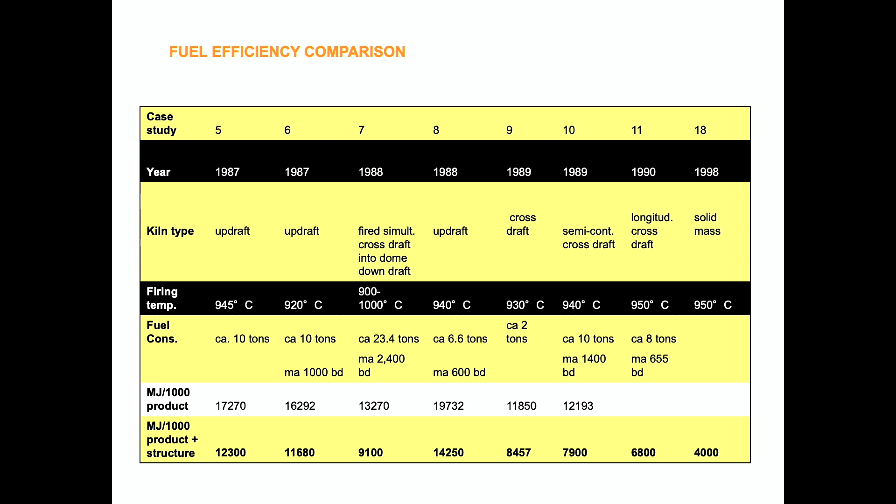We have compared all kinds of kiln systems. Ray Meeker did different kinds of architecture based on different types of kilns to see which type of kiln would lead to the most efficient house, where the brick would take half the energy to produce.

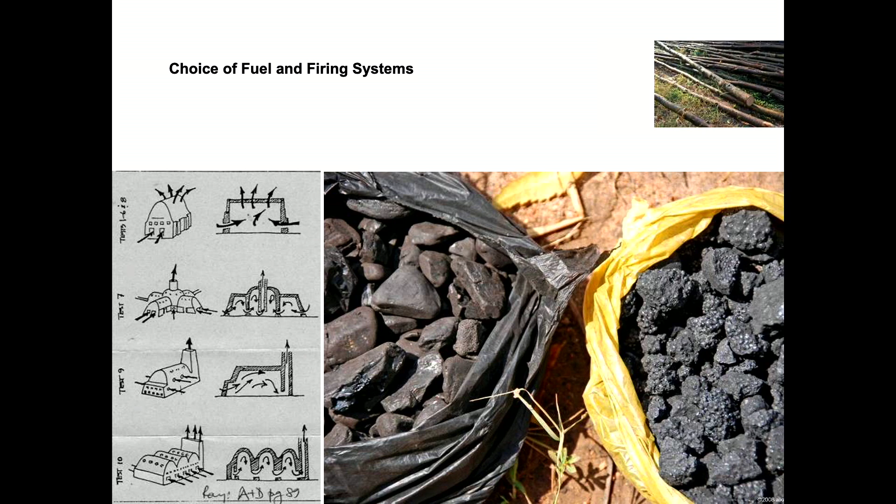Apart from tapping that energy, the brick house allows us to make the roof also with brick, not necessarily concrete, and the bricks don't need cement. The savings were so many that I first did a project called Spirit Sense, where I experimented with all this.

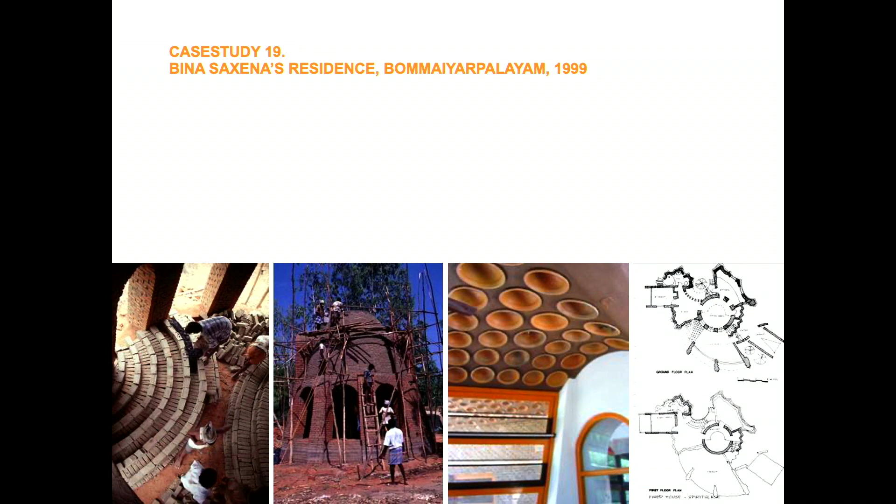That was in 1999, long ago. And eventually, sorry, I'm going to skip this. I forgot to remove these slides.

So basically, I'm going to show you that last project, the homes for homeless children I did in 2008, which was about having small little clusters and foster parents looking after one parent per four children.

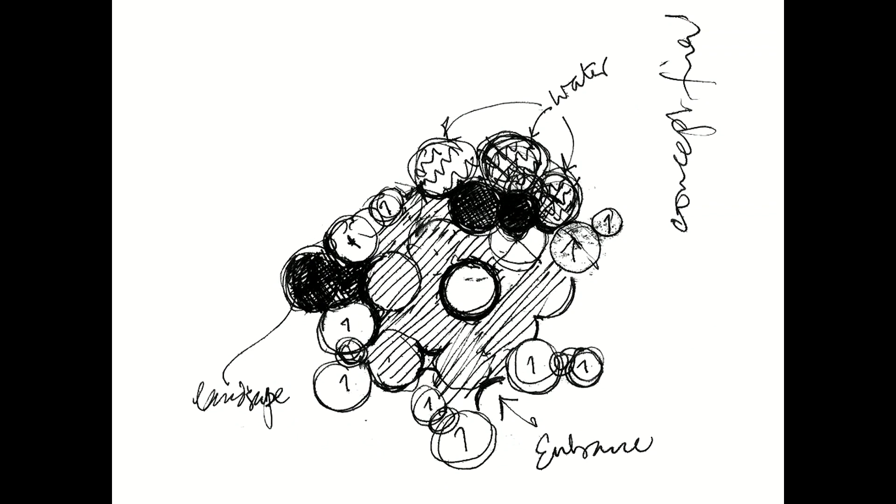I realized after all my PhD research and looking at all the ways bricks are made in the high-tech and low-tech parts of the world, that if I wanted to make this a real viable option from the energy side, I should make the brick very thin.

Because if it's like an eggshell, very thin, with no vault and fat walls with buttresses, instead if it's very thin, it'll be easier to cook it through.

The reason we managed to cook it through easily was because Ray Meeker invented a combustible insulation. He was only getting up to 650 degrees into the wall, and he needed 900. So he put up a mix with a little bit of straw and things which burn.

So in the last part, when it's at 650, that outer insulation just catches fire, and in the last minute you get another burst of fire. It's a lot of years of experimentation, what I'm telling you -- very exhausting work.

But then I designed the whole housing to not have a division between a vault and a wall.

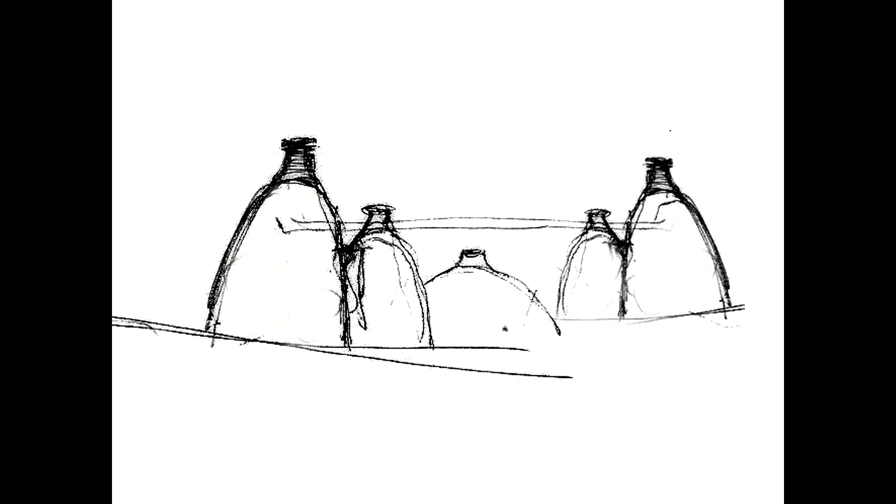So in the beginning I started with that, and in the end, I realized that space, like the womb, is actually like the egg -- it is also a home of someone. There was a very deep discovery in that, and I realized that's the cheapest thing to fire.

So I'm just going to quickly show you.

We built with mud. So you build mud bricks, make your bricks, then make your mud mortar. In my case, I used whatever I could -- there was no money for this project.

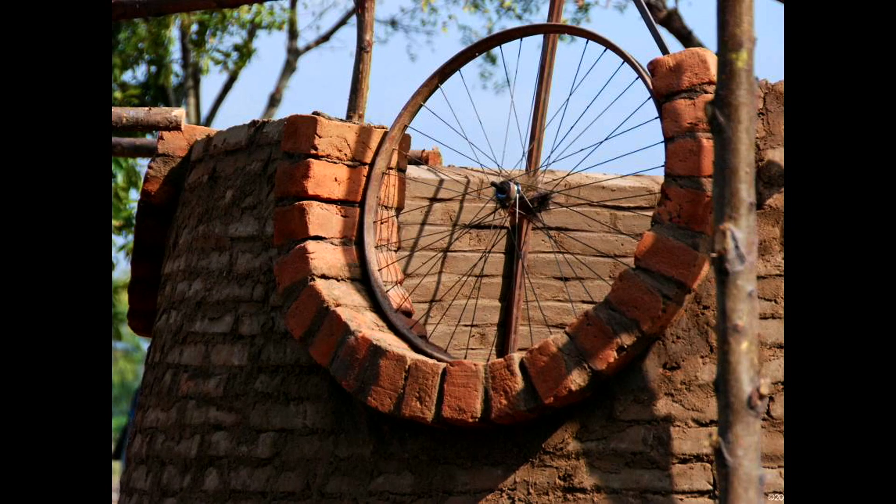So I used any kind of junk to make formwork, and adjusted the holes around that. I used fired brick only in places where I needed a little bit of stability.

When the fire comes, like when you put bread in an oven, you see it becomes wobbly for some minutes before it becomes hard. The same thing happens to the entire house.

So you don't want the stack inside to collapse. So at the edges, we used these kinds of bricks.

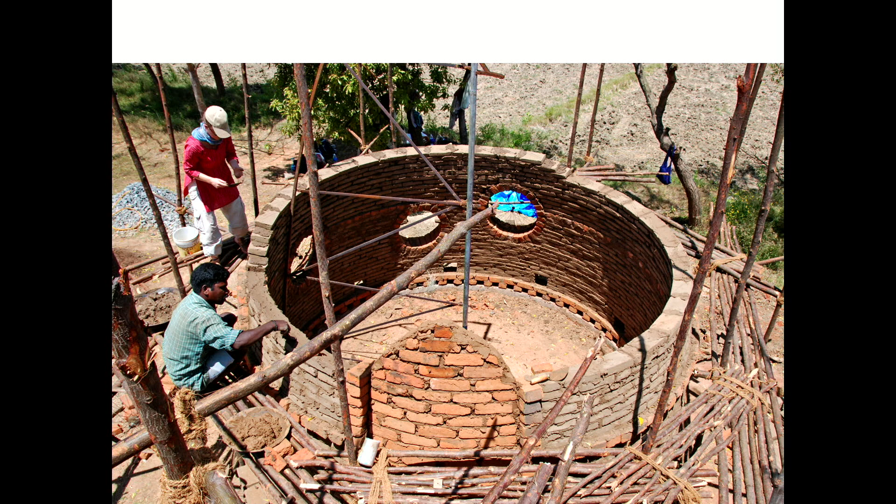So you have your dome. And then I made some kind of formwork, like a rotating pivot.

Everything has to be designed in our place. It's like you want a dress -- you have to go to a shop, choose the cloth, you have to do everything. So these are all the result of that kind of life.

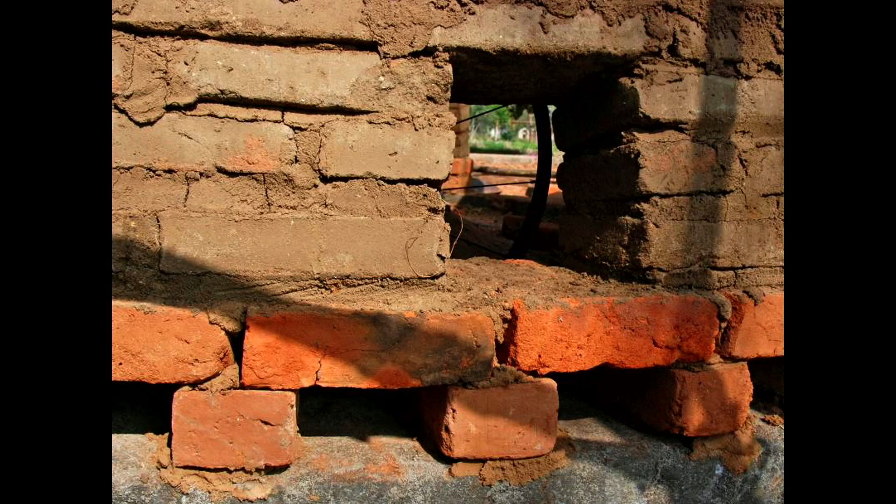Then you have to make little fire boxes to start the fire. The difference between this project and the others is that we found a way to not burn with wood, but took the coal dust from factories.

It's a waste product -- the dust from factories where coal still has some value, a powder that's left on the ground. You sweep it up and it still has calorific value.

We mixed 5% of that into the brick, and tested that if you put all your bricks tightly together, that coal will burn and will stop exactly when the brick is cooked, then move to the next layer, the heat.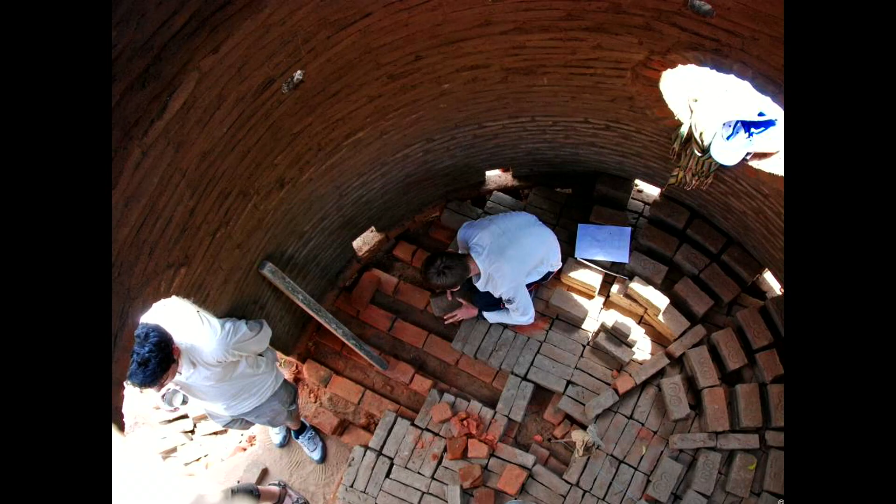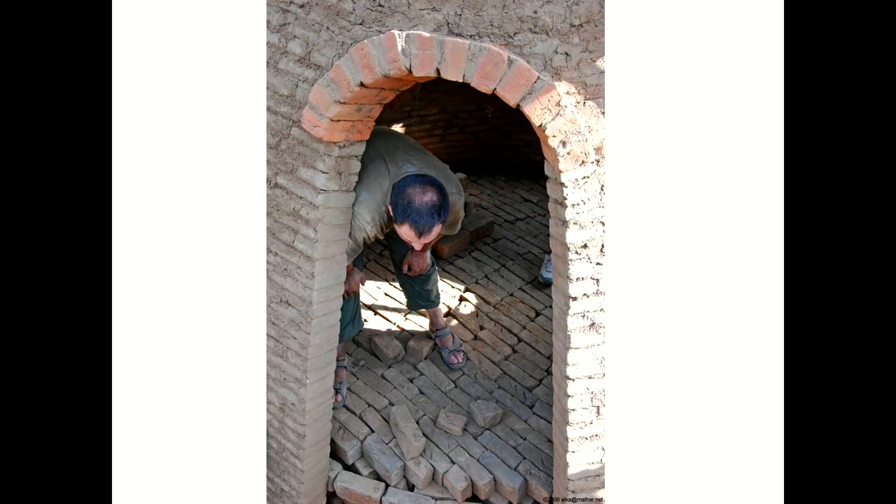This is a different type of firing we did here. We needed boxes like this only to start the fire, just to give it a start. And in the bottom, it's like a grill. We had to design it so air can come from below, so you see all these complicated shapes. In one layer we had coal put to start it, but all the rest are just normal, spreading the heat.

Then the insulation I talked about, which will be taken down later. And then the house cooks for 3 or 4 days, and it looks very amazing. It's just like you're waiting outside your oven to check how it is. And you can't do anything. If you made a mistake, you have to do it in the next house. You have to just wait. It's already out of your hands.

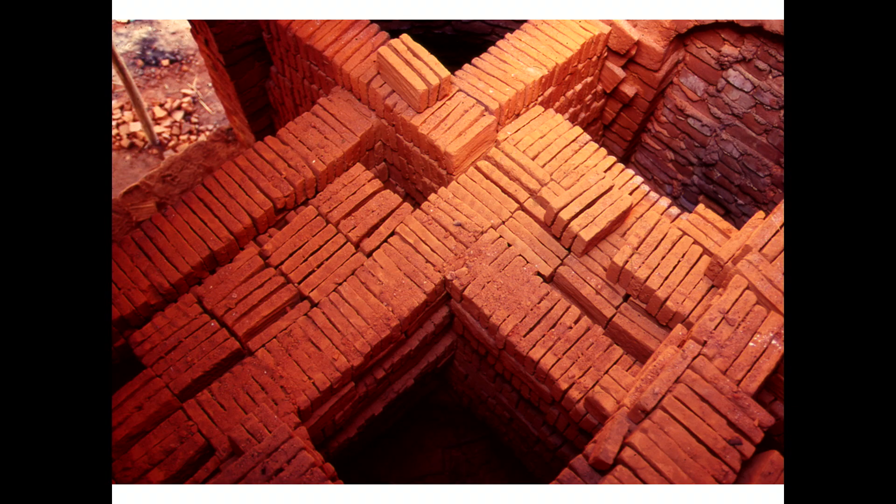Then the house is cooked, and we have to waterproof it. But all the bricks inside can be harvested, and you can make all your own sizes, whatever you want. You can also make wash basins, tiles, pipes — all the ceramic things we use can be made here. You can make bricks of any shape you want.

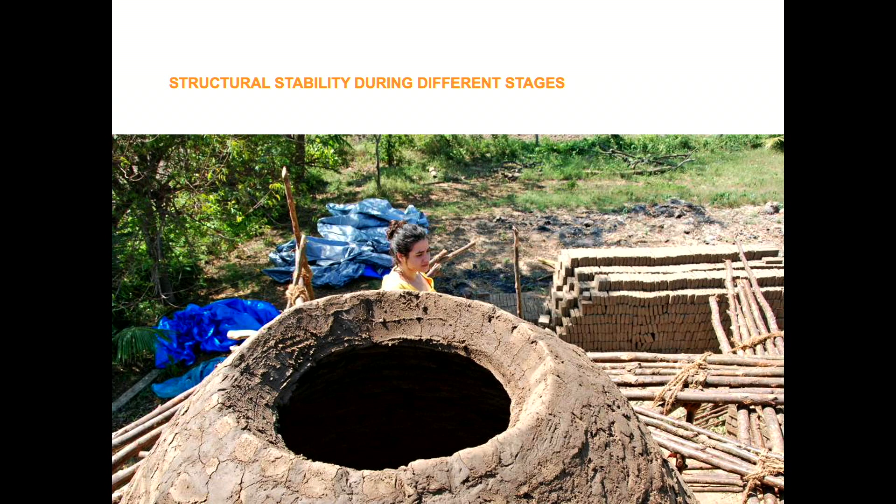The brick has to withstand being a mud structure, then it has to withstand the baking moment where cracks come, like in bread. Cracks are going to come, and when it cools, they will all fill in. All those things happen, and then you finally get a baked house. So there's a whole industry you can do out of it, like I said.

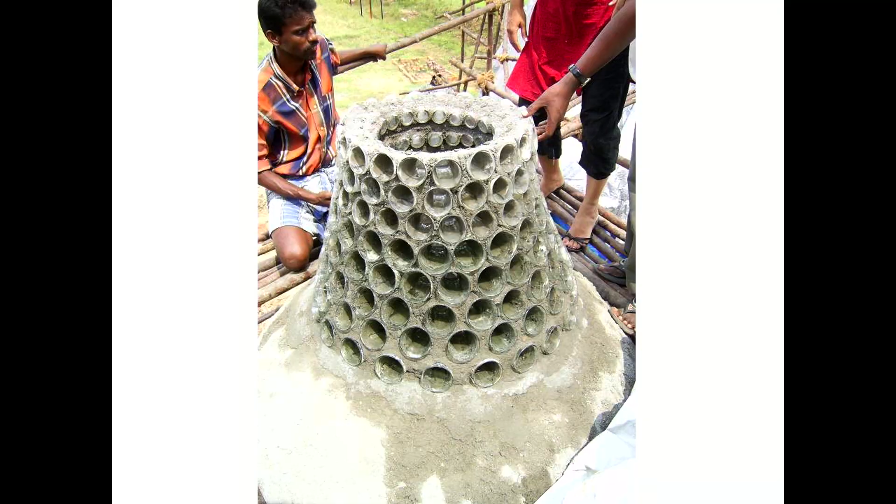So we finished the remaining part of the project also, with broken glasses, and we used a lot of urban waste to finish the house, but also to waterproof these areas with broken tiles. And that's what it is now.

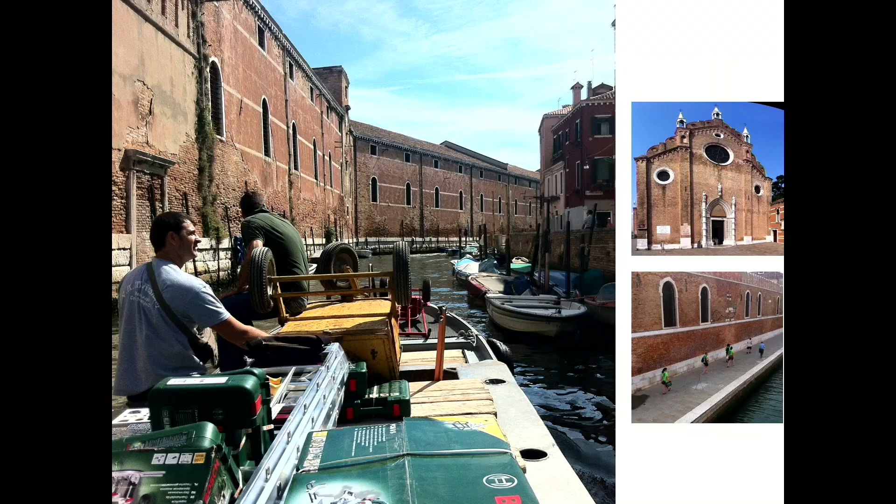I'll just show you a few images without explaining much, since we're talking about brick and earlier we talked about Venice. When I was called to Venice, the first time I participated in Chipperfield's Biennale, I saw exactly this kind of patchwork city. For me, Venice is a brick city — everywhere you see that when the plaster has peeled off, you see the different layers of history from which part brick was taken, where brick architecture was always made economically, like a patchwork.

So I thought it would be amazing to bring, because it was called Common Ground, I thought it's best to go inside that Arsenale space where you could see the brickwork only because the plaster was down, so you could see the construction. I thought it would be nice to install architecture that is in ruin, which reveals the construction, and mine would be an unfinished architecture which will also reveal the construction, showing that there is a common ground between how we made architecture all over the planet, across past generations and future — everything is in a general continuum. You see the vault, the catenary form — coincidentally, serendipitously, exactly the same shape, form and size as my own vault.

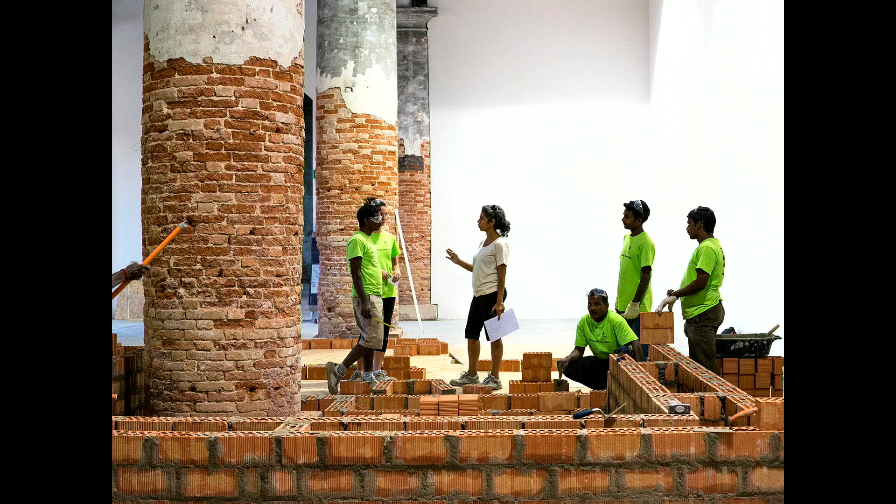So I got the idea — above here is a Mangalore tile, like the terracotta tiles too. I thought it would be quite nice to install here that the common ground is actually gravity and the natural laws. It's the same whether you're in Italy or in India — if a vault stands here, it will stand there. And also the humans are the same; we didn't change biologically so much.

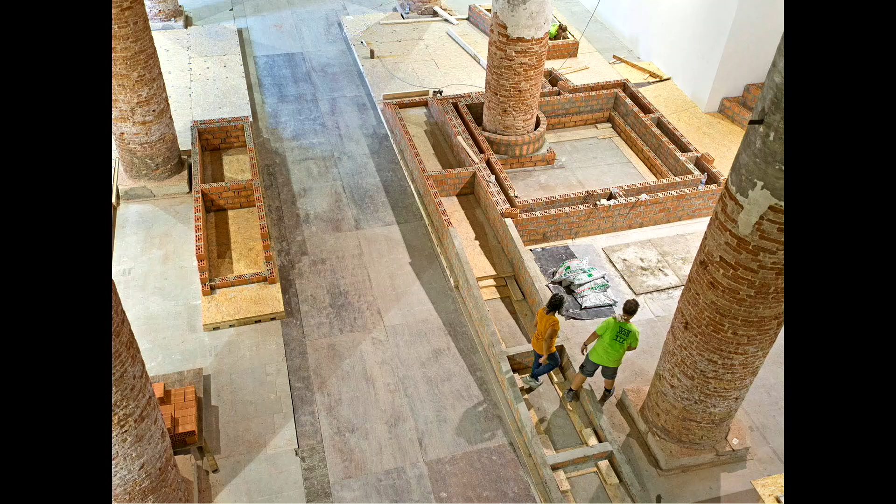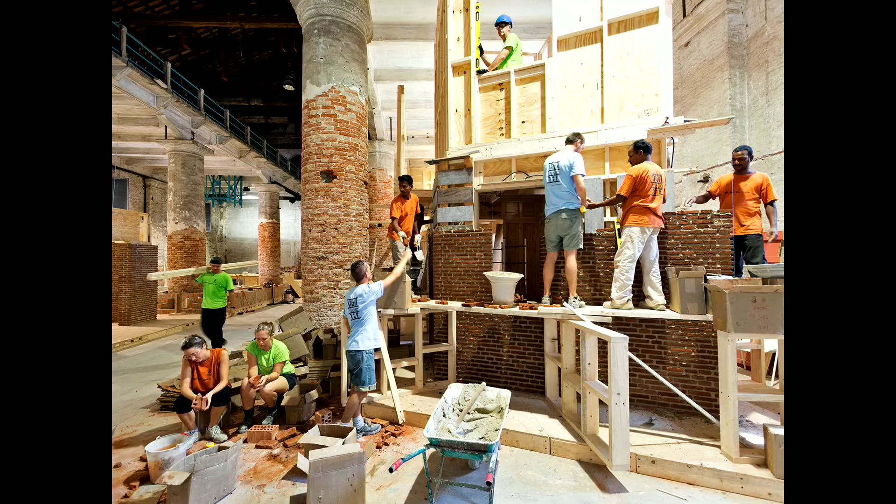So here I had the occasion to make the foundation with contemporary bricks because we are on Venice ground. The Venetians cannot use those bricks anymore, but my bricks look more like Venetian bricks when I brought them. These were all to show the common ground, and we produced all of this in full scale, a whole house in 6 weeks with our students, including the roof, but I also did some new touches there.

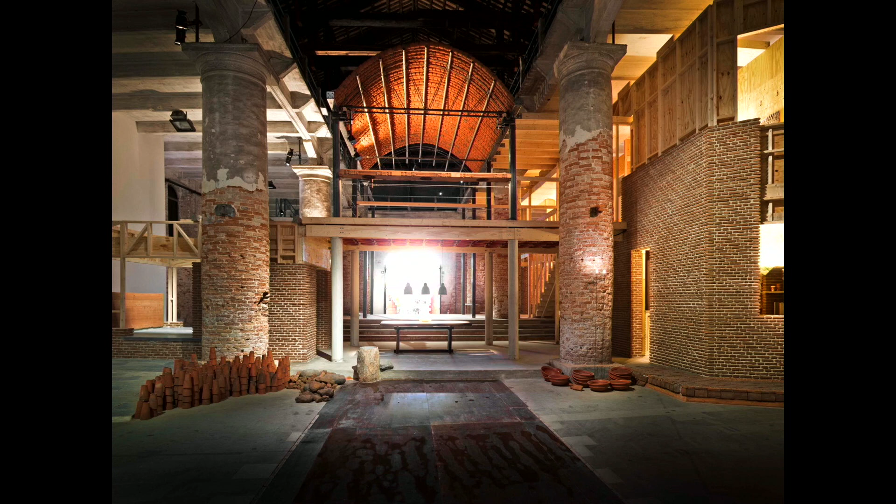I wanted to test with glass bottles — with Venice, we got our wine bottles, though we didn't drink all of that. But anyway, this is the final house, Common Ground. You see the roof and the roof above, the wall and the pillar next to it — the same language. One is from rural Tamil Nadu, that it would look not suitable in Italy. But, you know, just juxtaposing those two things.

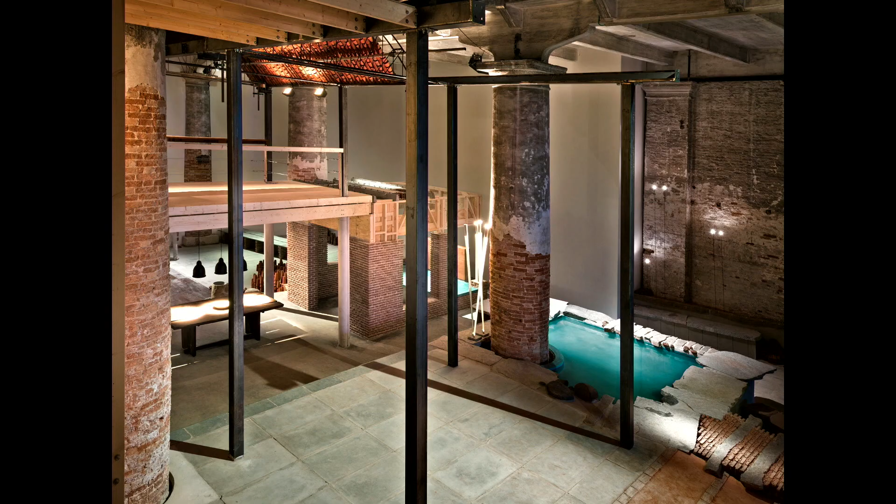And 3 more images from my recent exhibition in Louisiana called Taking Time. The intention was not to delay and take time in that meaning, but the idea is to think about architecture not only from the space point of view, but also from the time point of view, in terms of which time we are building in, and to not see things in isolation, but to zoom out and see the big picture.

Taking the time means not to dismiss something today because we say time is money. Time is all we have. Time is our life, and if we take it, we will be more fulfilled. Taking time means to take things into our own hands, and mostly it means to take the time to think. Thank you.